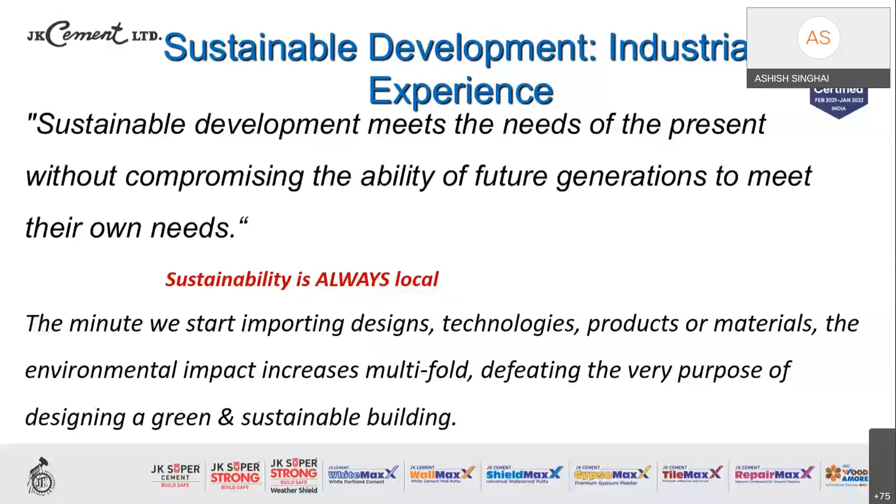The minute we start importing designs, technology, products, or materials, the environmental impact increases manifold. That very well defeats the purpose of designing a green and sustainable building, or for that matter, any built environment. So largely, sustainability is supported on three broad pillars.

First and foremost is environment—resource conservation, environmental protection, biodiversity preservation. Second is society—what is our role towards society? Energy and food security, health services, and all those basic amenities. And obviously, without sustaining the economy, these two cannot work. Economy also plays its very important role—cost efficiency, profitability, and growth valuation of services.

Meaning thereby, if we are constructing a building or any project, if proper design parameters are not put in place, if the materials are brought from far-fetched distances, possibly we may have a wonderful structure, a beautiful architectural structure, but it will defeat the purpose of economy. So environment, society, and economy are the three basic pillars upon which the sustainability model works.

Talking about sustainability and green development, what does it offer to us? Improve the quality of life, protection of the environment. For that, we need to use industrial waste. I will elaborate more in the succeeding slides.

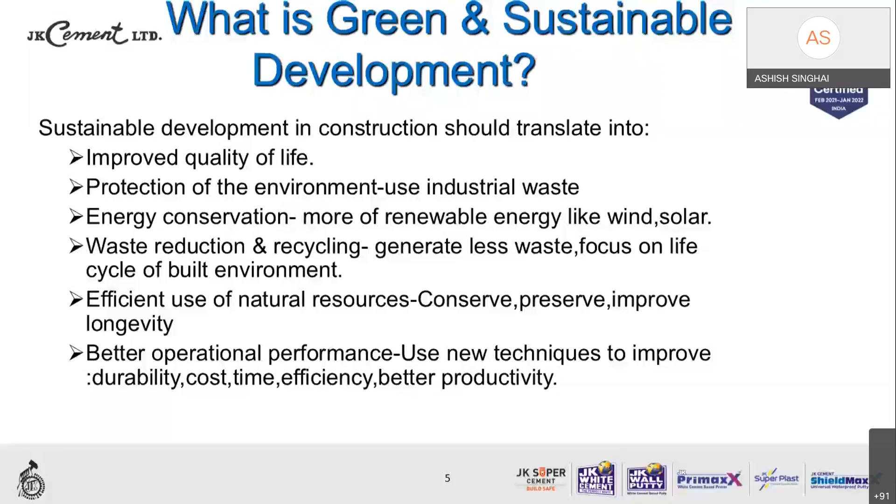Now, talking about sustainability in terms of green buildings, we have to use more green materials in construction. What are the green materials? I will elaborate in the succeeding slides.

Optimizing the demand of electricity. Let us replace most of the electricity by virtue of solar, hydel, and wind power. Generate electricity for the building purpose itself. Cater to all its water demand through sustainable processes such as rainwater harvesting, treating and recycling the wastewater of the site if possible.

So now a green building treats the water which is generated out of its own utilization, and it can be put to use for gardening, car washing, and cleaning of the society areas.

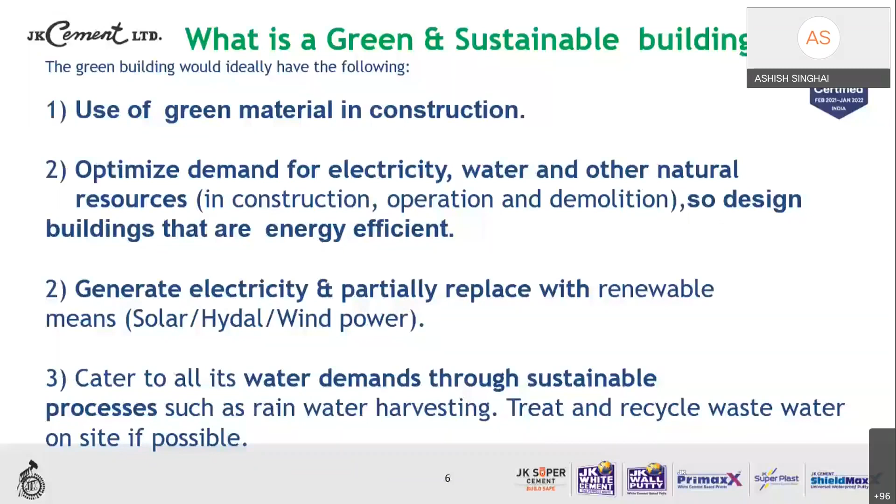Secondly, rainwater harvesting has become almost compulsory in most of the areas, and government is also harping on that. I would like to elaborately mention a very good example of Indore Municipal Corporation, which has mandated that every new construction shall get permission for construction only if they present the provision of a rainwater harvesting system in their house. Such encouraging or binding steps would only encourage rainwater harvesting. As we know, over the years there has been considerable depletion of groundwater tables, and such steps will definitely help conserve our water resources to a larger extent.

Recycling and reusing the waste generated at the site can be put to use in the form of coarse and fine aggregates. Let us generate optimum waste. For that, you need very good planning so that you call only as much material to the site as is required, reducing waste generation significantly.

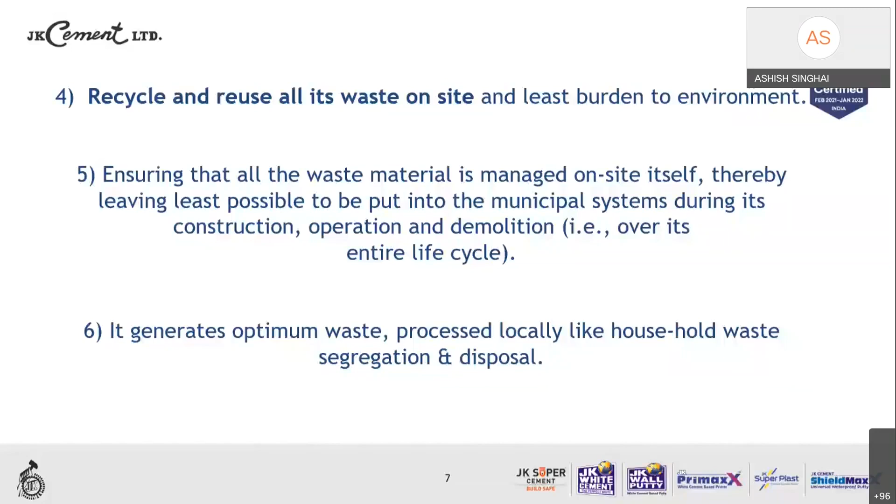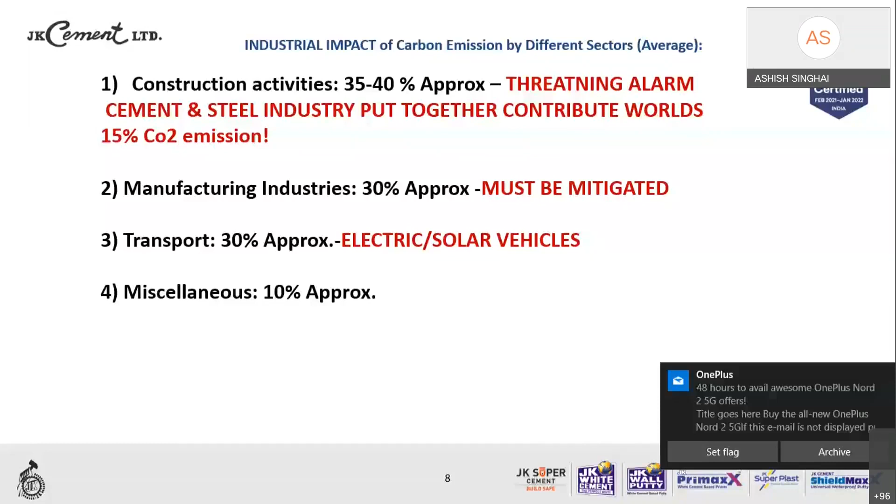Now it's very important to consider the industrial impact of carbon emission by different sectors. We are all concerned about greenhouse gases, about the emission of carbon dioxide and carbon monoxide, which are hazardous, go into the atmosphere, deplete our ozone layer, and thereby increase global warming every passing year. As you must be reading in news articles, every year the globe is getting warmer by maybe 0.5 or 0.7 degrees Celsius. Just imagine the quantum of glaciers that will melt due to this warming, and studies suggest that countries lying along these glaciers or water bodies may not exist a couple of decades down the line as the globe becomes warmer. So all these things have to be anticipated in advance, and for that we need to curtail carbon emission by industries, including the construction industry.

How much carbon emission is done by these different industries? Just a glimpse of that, not elaborating, but a broad picture. Construction activities alone contribute to the extent of 35 to 40%, which is significant. Out of this, you would be surprised to note that cement and steel industries globally put together contribute almost 15% of carbon dioxide emission. That's something huge, humongous.

We need to see how carbon dioxide emission can be minimized or curtailed in these two major industries. Obviously, without cement and steel there cannot be any construction or infrastructure activity, and no growth for the economy. But can we have some technology or system in place to minimize carbon dioxide emission? That is something we all have to look into. Manufacturing industry, apart from cement and steel, contributes almost 30%, so that also has to be looked into.

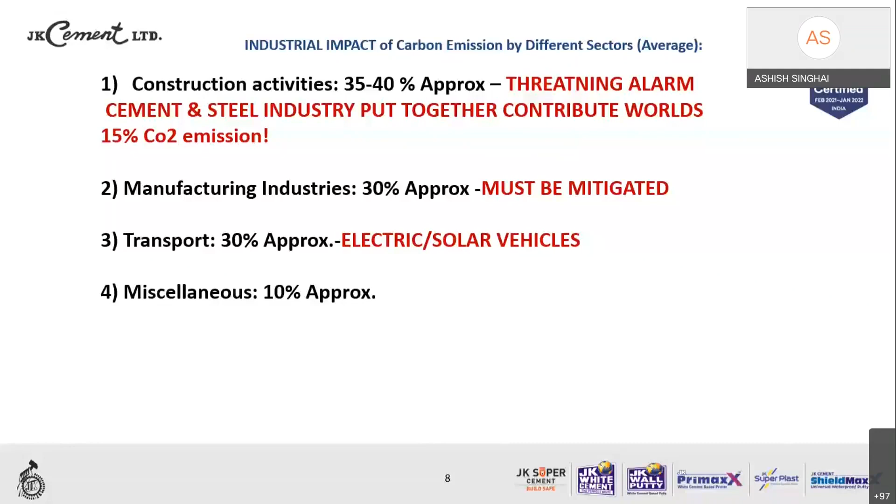Now moving further, I would like to give a brief introduction on embodied energy of building materials, known as EBE. So what is embodied energy? For any material which we see in its proper, finished shape, if we go from the starting point, the product goes from mining or extraction of natural resources to the manufacturing process to transportation to product delivery. All these different channels of product manufacturing have energy contribution. Energy is required from the mining stage to manufacturing to transportation, and finally the product delivers to the end consumer. So all these channels require energy, and this energy inbuilt in that particular product is known as the embodied energy of the building material.

Indian affordable houses do not require much energy in operation, and the maximum energy requirement is during the construction stage. This amply clarifies that we need to focus on the embodied energy of the product not only at the operation stage, but at the same time, at the procurement stage also.

Buildings are largely responsible for 40% of global energy use and contribute towards 30% of total carbon dioxide emissions. So we need to devise technology for minimizing or mitigating energy consumption and carbon dioxide emission.

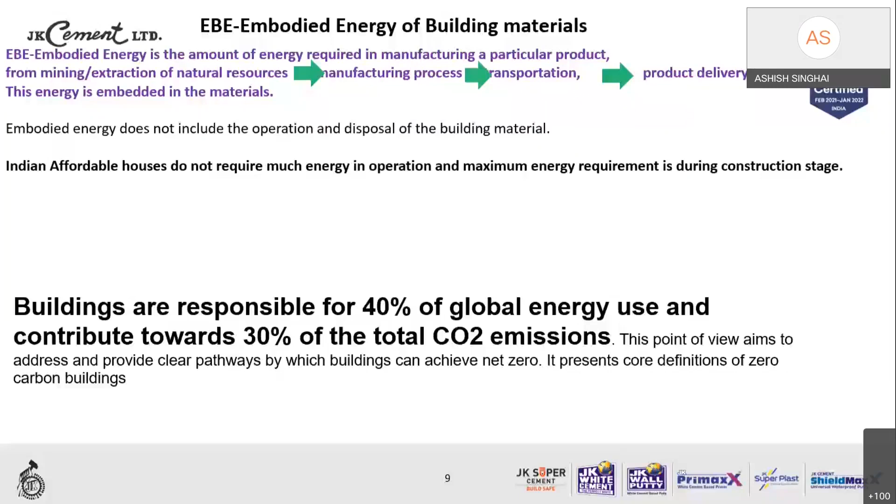What are the sustainable tools for conservation of energy? First is reusing building materials instead of constructing new ones. Renovation and reuse projects typically save about 50 to 75% of the embodied carbon emissions compared to constructing a new building. Instead of going for a new building, can we renovate or make some corrections and make it useful? That will typically save over 50% of the embodied carbon emission.

Second point is specify low carbon concrete mixes. If we make more use of fly ash, slag, and other supplementary cementitious materials while producing a certain grade of concrete, then as the quantum of cement is reduced, the concrete becomes greener, and it can be termed as a low carbon concrete mix. Such designs can be done.

Third is limit carbon intensive materials. What are carbon intensive materials? Materials which require high amounts of carbon dioxide emission during manufacturing, for example steel, cement, aluminum, copper. Such materials which require huge quantum of carbon dioxide emission during manufacturing can be reduced. For products with high carbon footprints like aluminum, plastics, and foam insulation, thoughtful use is essential. We can minimize these elements as far as possible in our construction.

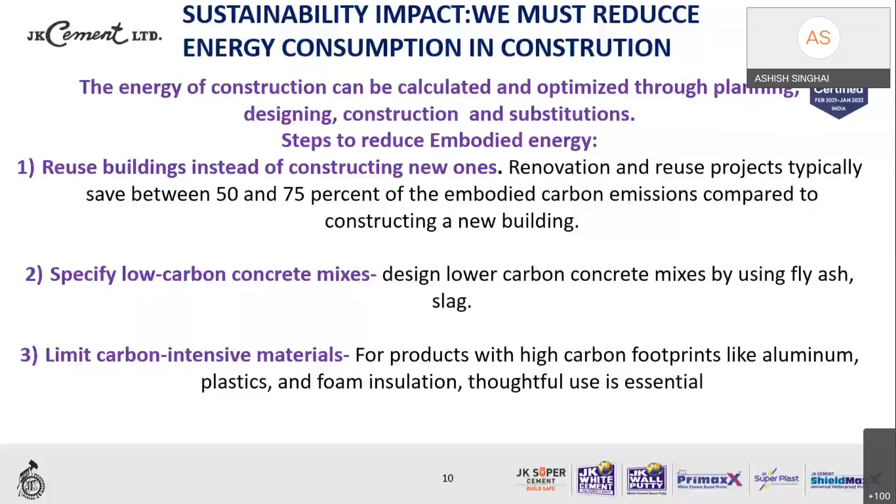Fourth is reuse the materials. Wherever possible, look to salvage materials like brick, metals, broken concrete, or wood. By doing that, we can mitigate CO2 emission.

Next point is to use high recycled material. This is especially important with metals. Virgin steel, for example, can have an embodied carbon footprint that is 5 times greater than high recycled content steel. High recycled content materials have to be a part of your project and your architecture. For example, take the instance of AAC blocks, fly ash bricks, and recycled or reclaimed wood materials that can be put into use in your buildings. By doing that, you can significantly mitigate carbon dioxide emission as far as your project is concerned.

And use fewer finished materials. One way to do this is to use structural materials, good concrete as finish, and minimize waste. Nowadays we have such beautiful quality materials for supportings or scaffolding, like Mivan shuttering material, which gives such a beautiful finish to your structures or concrete members that you need not go for any kind of plastering. The finish itself is so bright, clear and beautiful that plaster can be avoided. We need to design structural members which require less finishing material, and as the finishing material quantity goes down, you've started mitigating the carbon dioxide footprint. We need to design structures wherein waste is minimized to the largest extent.

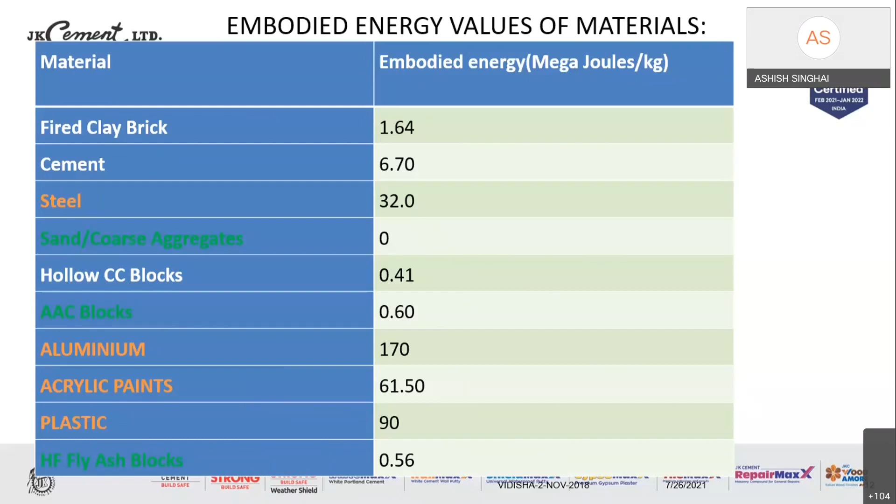This is the embodied energy content of a few prominently used building materials. Just look at steel - it is 32 megajoules per kg, very high. Cement 6.7 megajoules per kg, pretty high as such. Aluminum is almost 170, paints 62, plastic 90. Compare these with natural materials like sand, which requires low energy. Hollow concrete blocks 0.41, AAC blocks 0.6, high fly ash 0.56. Compare these with the materials I already mentioned - there's a huge difference in embodied energy. We need an optimum design wherein more materials with low embodied energy shall be used compared to those with high embodied energy.

Nowadays, a lot of work is being done on net zero, that is decarbonized buildings. This is also part of the climate change resolution passed in Paris. I will read it to you: there is a need to decarbonize, that is to bring net zero carbon dioxide emissions in the world's built environment by 2050, to meet global climate change goals.

CO2 emissions must be mitigated. Climate change and a rapidly warming planet pose a significant threat. According to the Intergovernmental Panel on Climate Change (IPCC), by 2030 we need to reduce carbon emissions to limit the overall temperature increase to below 2 degrees Celsius, in line with the Paris Agreement. So the basic agenda on this international platform is that all-around efforts are needed globally.

To decarbonize, or bring the world to net zero carbon dioxide emissions, is possible only when all economies, developed as well as developing, come together on a common platform. They agree to the resolutions, they agree to all the requirements, they agree to all the initiatives to be taken. Then only can we have sustainability in terms of significantly reducing carbon dioxide emissions.

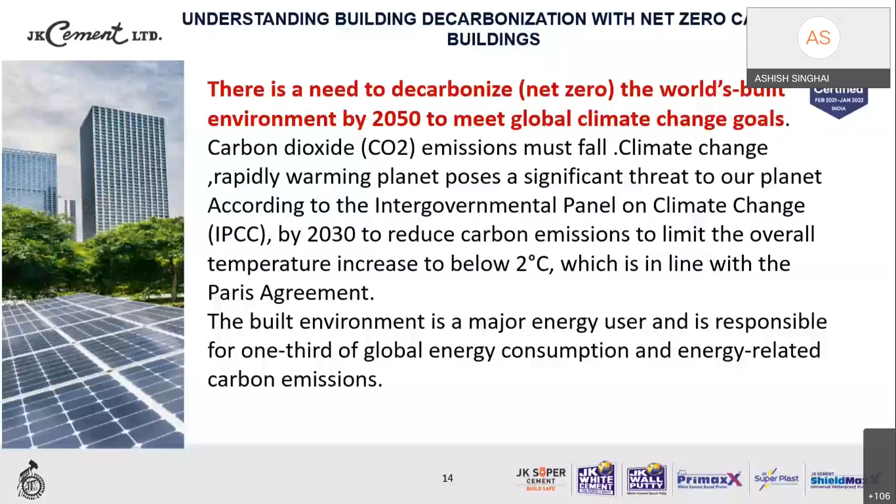Nowadays, different methodologies are being worked out. Talking about civil engineers, green concrete has already been developed. What is green concrete? It is something where we mineralize atmospheric carbon dioxide and inject it into the concrete mix, thereby reducing the amount of cement required in building projects. As we know, cement has a high embodied energy, almost 6.7.

Can we minimize cement content? Then strength and other durability parameters will be affected. So, still keeping durability and strength intact, if we can somehow reduce the cement, green concrete has come up as an option. It is still a very new technology wherein we mineralize atmospheric carbon dioxide and inject it into the concrete mix, allowing us to reduce some quantum of cement for a particular project.

What are the other environmental benefits of green concrete? First, it has very good durability. Energy consumption is significantly reduced, and obviously the basic purpose is significantly reducing carbon dioxide emissions.

What are the advantages? The method of preparation of green concrete is the same as conventional concrete - no rocket science, we can use the same method. It reduces environmental pollution, has very good thermal and acid resistance, reduces overall cement consumption, is economical compared to conventional concrete, and has better workability. So green concrete is going to be the future of concrete.

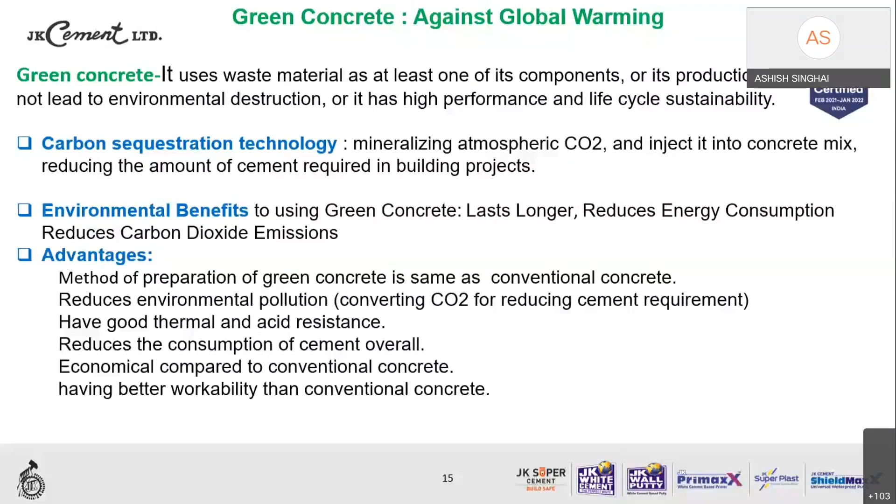What are the other sustainable solutions from the industrial view that will make your structure greener, sustainable, and innovative? I have a number of solutions. I will start with blended cement. Everybody knows blended cement is something where a lot of industrial waste can be put to use, and we can produce greener, sustainable, and economical concrete.

This is done by using fly ash and GGBS. Fly ash is a waste product of thermal power plants, available in abundance - heaps and heaps are available across India, with no proper utilization until a few years back. Now it has picked up good momentum, and a lot of study and research is being done on how to increase and improve the percentage of fly ash in manufacturing cement as well as concrete.

Similar is the case with ground granulated blast furnace slag, known as GGBS, again a waste product from the steel industries. A humongous amount of GGBS is available from these steel plants. Now the government has taken initiatives and incentives to encourage utilization of fly ash and GGBS for manufacturing good quality cement and concrete. BIS already has very good codes in place for both fly ash based and GGBS based cements. I will elaborate a little further in the next slides.

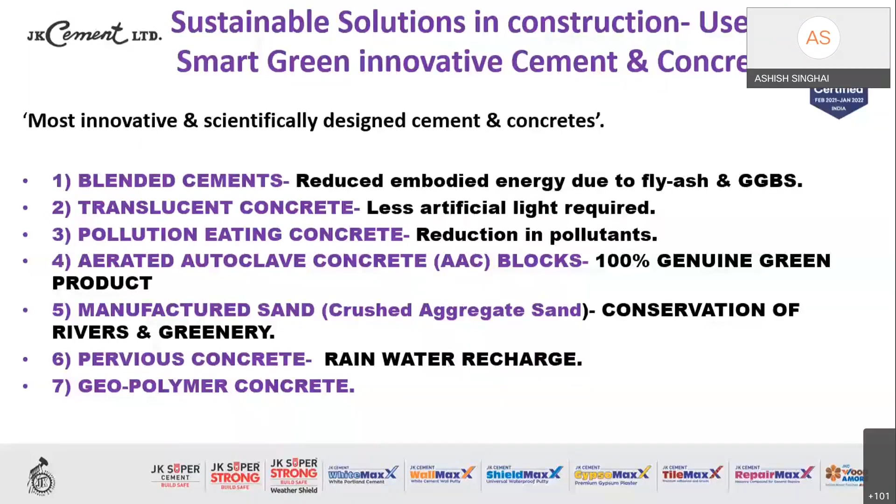So these are all available supplementary cementitious materials for significant reduction of carbon emission: fly ash, slag, silica fume, metakaolin, and rice husk, which is essentially an agriculture waste.

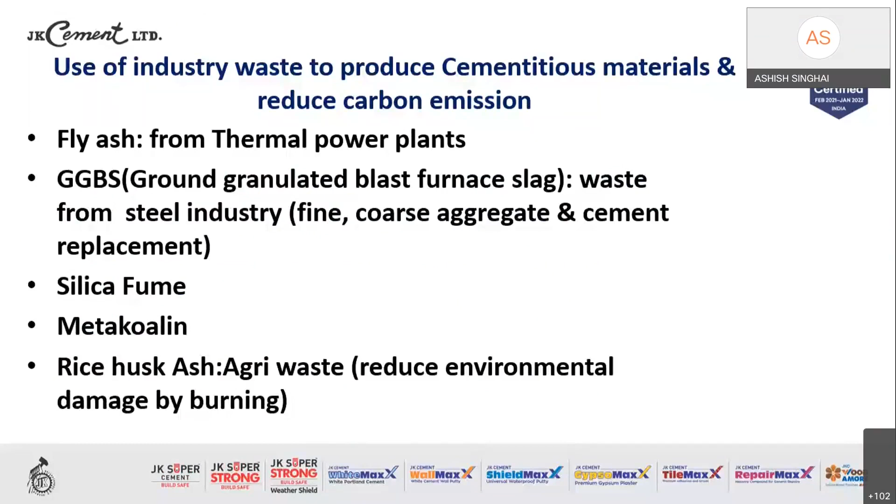But if it can be put in place as far as things are concerned, we can save a significant amount of fossil fuel, that is coal.

What are the environmental issues with OPC production? Every single ton of ordinary Portland cement production releases 0.9 tons of carbon dioxide gas in the environment. That is a very, very strong statement.

As I mentioned, cement and steel industry alone are contributing 15% of carbon dioxide to the global environment. 15%, 1-5, out of which 7% is contributed by the cement industry itself. So we need to ponder on these two statistics very heavily, and design strategies, methodologies, and engineering in such a way that we can have less dependence on all these materials, whereby we can mitigate the carbon dioxide emission. So that will be our support to sustainability.

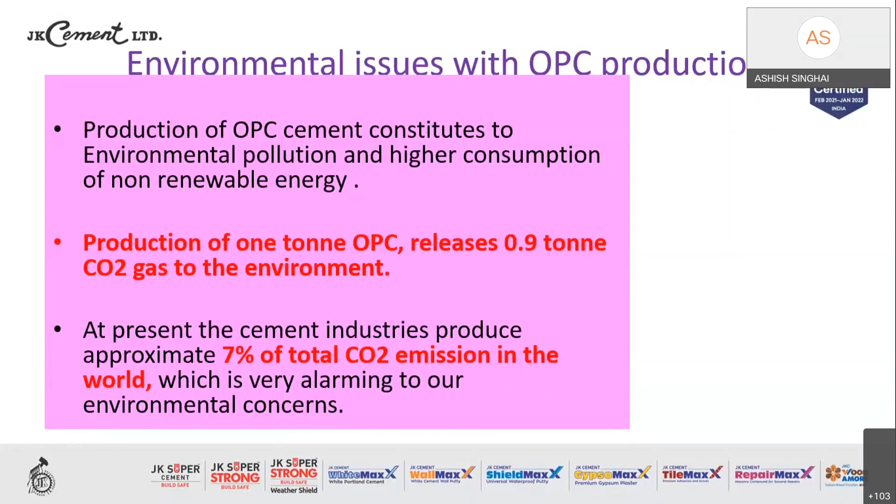As we all know, blended cements are far, far superior, far, far better as compared to ordinary Portland cement. Talking about comparison on strength, it has 15 to 30% better later strength. It has significant reduction of heat of hydration by 35%, so cracks and all such things will not take place.

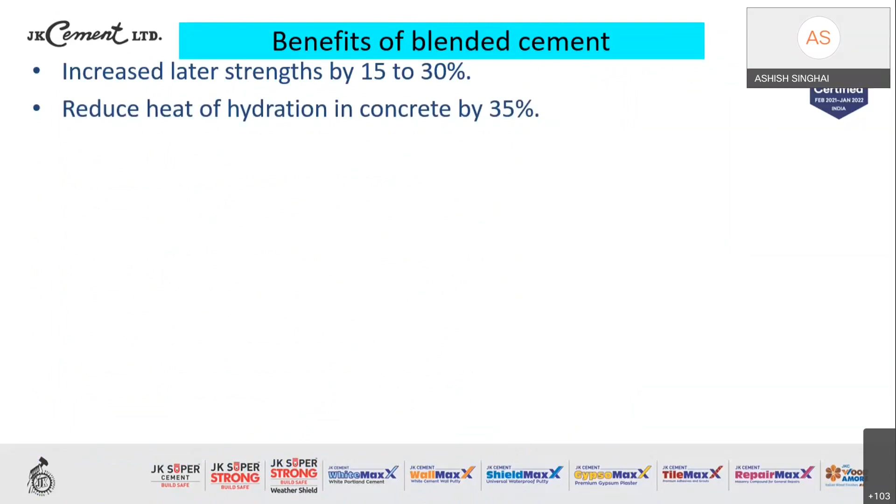It densifies your concrete by 60% more than traditional OPC concrete, so the pore volume gets refined. It increases the water tightness by almost 34%.

It has better resistance to sulfate, chlorides, and alkali aggregate reaction. These are the chemicals which affect and deteriorate your concrete quality in the long run. So if the cement being used for the concrete is blended cement, either PPC or Portland slag cement or sulfate resisting cement, such cements will have better resistance to protect from the attacks of sulfate, chloride, and alkali aggregate.

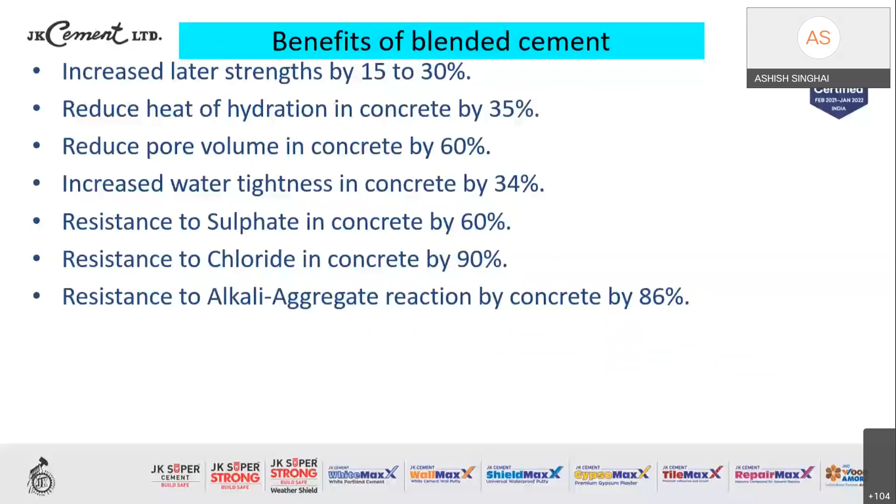So from a sustainability aspect, we can say that the life of limestone increases by 30 to 50%, as across India we have got heaps of fly ash and slag utilized for better quality cement production. So now not only are we getting a better quality, durable, sustainable concrete, at the same time we are reducing the burden on our mother earth by utilizing these waste materials.

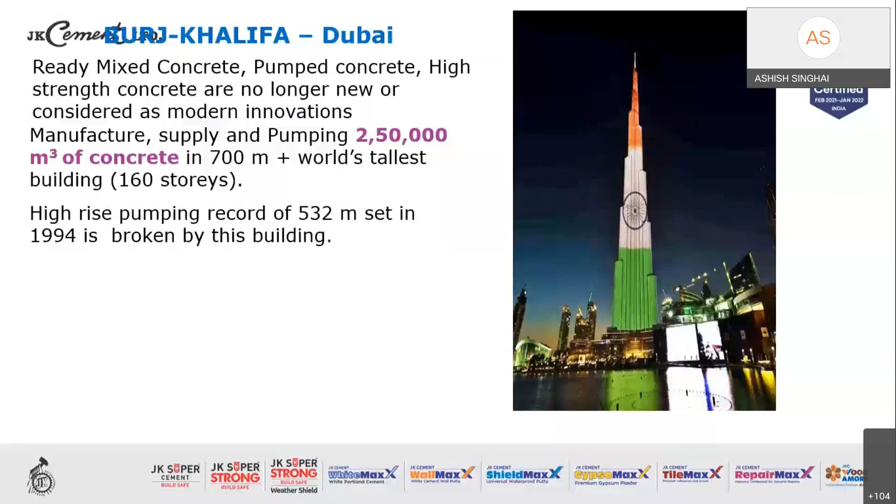Talking about the strength, durability, and overall qualitative parameters of blended cement, I think there cannot be a better example than Burj Khalifa, the world's tallest tower in Dubai, which has utilized more than 250,000 cubic meters of concrete, all prepared with blended cement. The other example is the Twin Towers in Malaysia, where 100% of concrete production was done using blended cements.

So now, what could be the environmental and sustainable impact of all this blended cement? The first thing is that we can reduce 650 million tons per annum of solid waste, that is fly ash, reducing the overall burden of fly ash to the extent of 650 million tons.

800 million tons per annum of carbon dioxide emission can be reduced. This is what we are all talking about. 1,000 metric tons per annum of raw material can be saved in cement production annually, meaning we can have a longer life for our limestone reserves. And apart from that, icing on the cake, we have got higher performance cement and concrete.

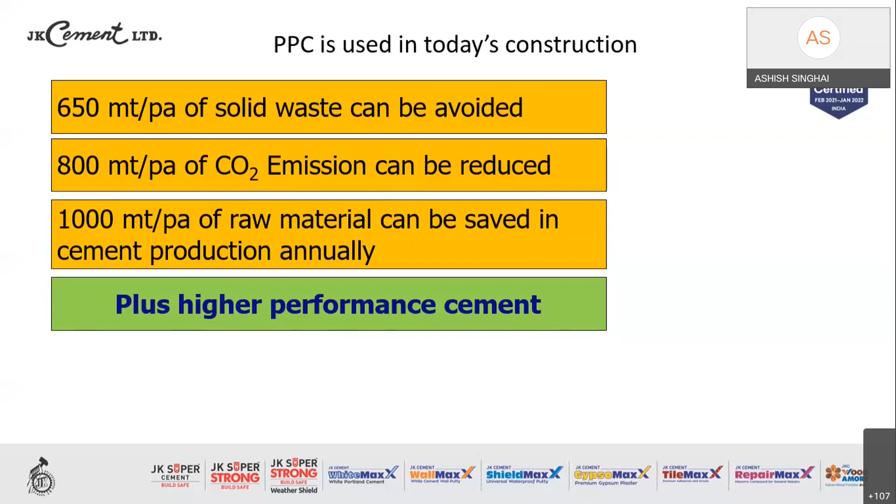So they will essentially harm your embedded steel. We need to go for such type of cements for such type of areas, wherein the impact of chloride attack and sulfate attack, as well as the alkali aggregate reaction, can be minimized to a larger extent. For such type of constructions in these coastal lines, we always recommend going for Portland slag cement or Portland pozzolana cement.

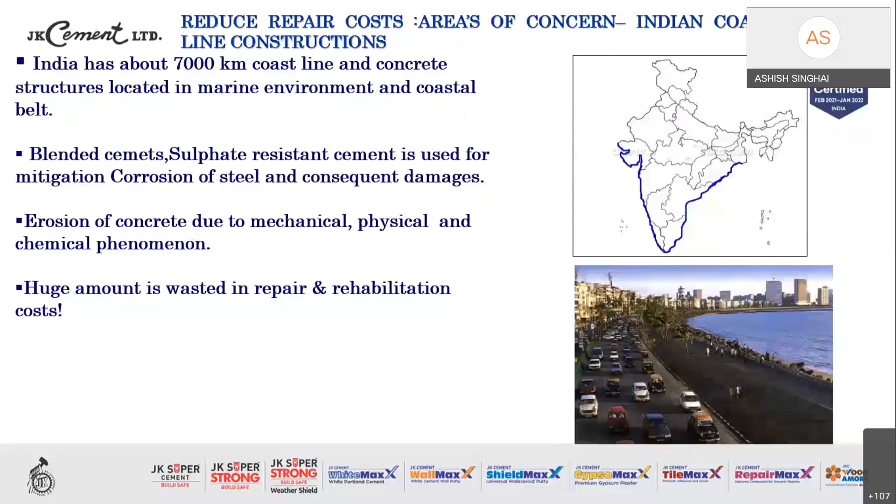That has all come out of our own studies, out of our own understanding, and the kind of years that we have witnessed the quality of such structures which were constructed using all these materials. If ordinary Portland cement is being used in the concrete for such type of coastal area construction, whether it is a pier or any kind of structure situated along the lines of these marine areas, you will see what kind of deterioration it can lead to.

Now, how to minimize dependence on artificial lighting?

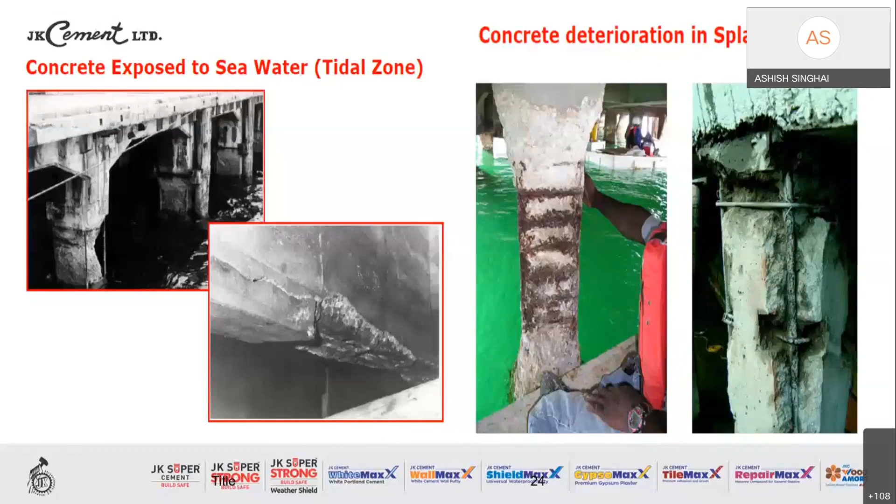One architect from Hungary, Mr. Áron Losonczi, has developed a wonderful material by the name of translucent concrete, or in simple language, light transmitting concrete.

How does it take place? He used 96% fine aggregate and inserted optical fibers to the extent of 4%, plus some good quality additives, fillers, and polymers. By combining these, he prepared a concrete where deliberately no coarse aggregate was used.

Using that, the density achieved was about 2,100 to 2,400 kg per cubic meter. It was light in weight, but the optical fibers inserted within that concrete matrix meant that when light was emitted from one side, it got transferred to the other side.

40% of visibility was there within that concrete element. This was a very novel and unique design by Mr. Áron Losonczi. The only limitation is that it is not a structural member. It can be used as a facade or as a building block for buildings, especially for green buildings - quite ideal and very aesthetic to look at.

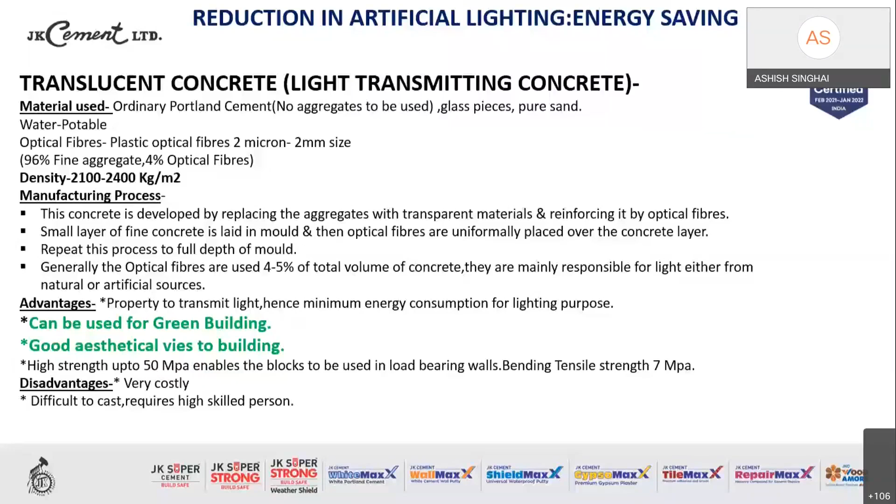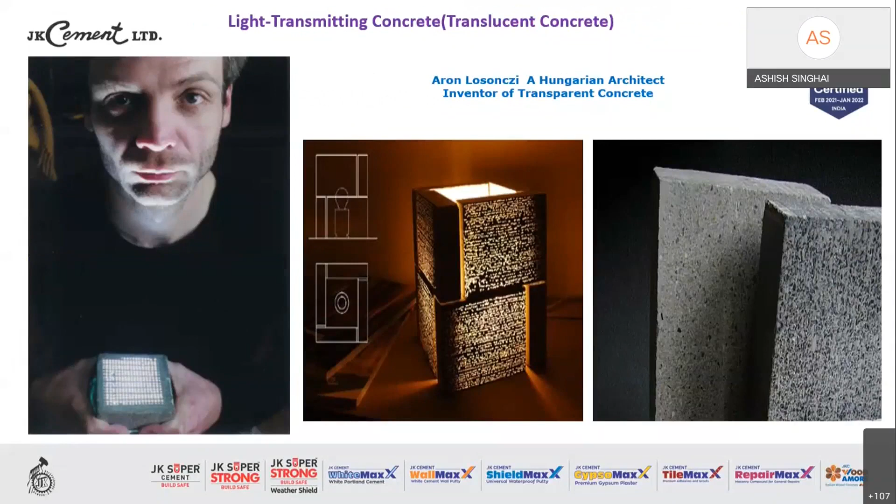A few more pictures of that. If we can use this kind of block in our buildings, especially sun-facing buildings, or where the facade can be of larger size, we can ensure that dependence on natural light increases and artificial lighting can be significantly reduced, thereby reducing overall electricity consumption bills.

Now, talking about pollution eating cement, a very noble and innovative kind of cement being developed by the Italian firm known as Italcementi. Coincidentally, I was working with this organization a couple of years back. Italcementi is the world's third largest cement and building material manufacturer.

What did they do? They mixed titanium oxide with normal cement plus a few polymers and prepared a cement which has a wonderful quality of converting the polluting oxides into oxygen plus nitrogen, which can be easily washed off. Now, when can it be used? In structures which have hazardous chemicals in the form of nitrogen oxides and volatile organic compounds.

These pollutants have a tendency to settle on the top surfaces of buildings, and they remain there for years together. They do not break down, and cannot be wiped off easily. Now, if we just apply a coat on the top surface of the building with this particular cement...

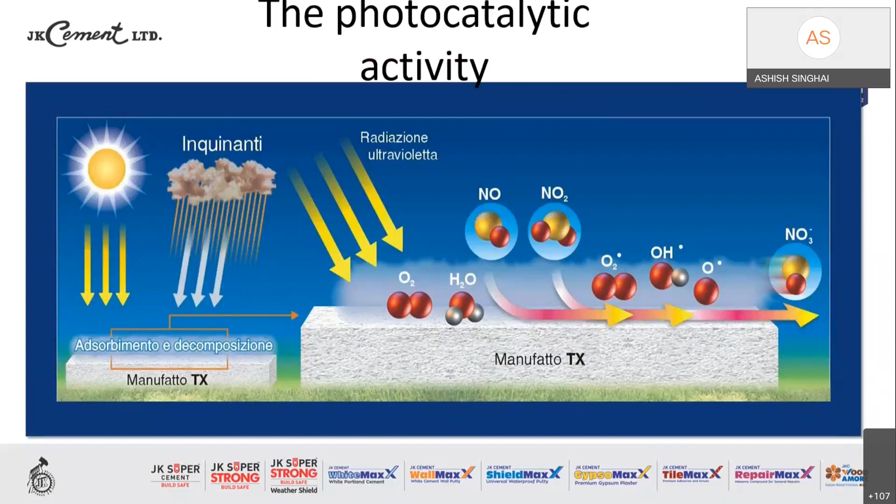The only thing is that it's a very costly material, not available in India, but across developing countries, or maybe developed countries like France, Germany, Japan, and some parts of the United States of America. This particular product is used extensively for external facade pasting.

A very sustainable concrete, pervious concrete, is nothing new. Most attendees might be aware of it, but it has become the need of the hour in the context of continuous depletion of our groundwater tables in many states of India. Pervious concrete is not rocket science any longer. It can very well be used and manufactured with simple methods. Most ready-mix concrete manufacturers already have this technology with them.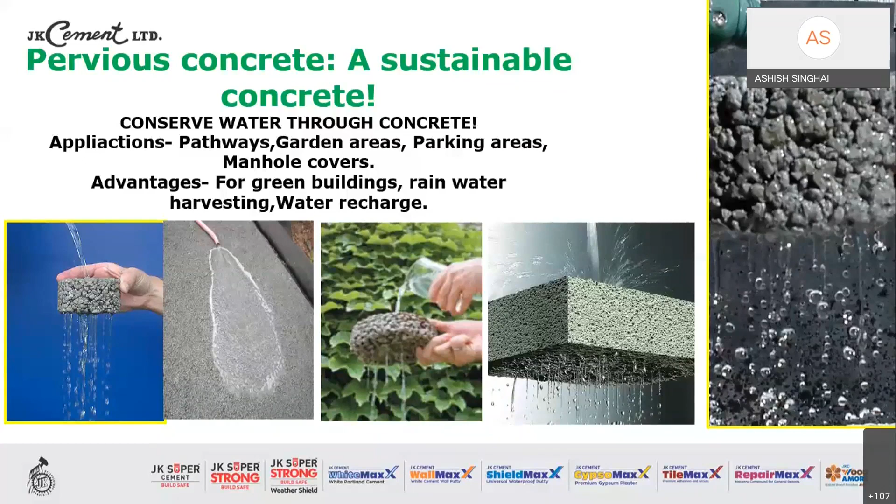Pervious concrete has large volumes of interconnected voids, almost 15 to 35%. In typical concrete, BIS permits up to 1% of voids, but in pervious concrete we have a very high percentage of almost 15 to 35% of voids, which are interconnected. It is made from cement, coarse aggregate, and water. Cement and coarse aggregate put together make about 95%, and then we have some fillers, fine sand, as well as some polymers, and obviously water.

It contains little or no sand, which results in a porous structure so that water passes easily. When used for paving, it can take in storm water at a rapid rate of 3 to 5 gallons per minute per square foot of surface area, which exceeds the flow rate needed to prevent runoff in most rain events.

During the rains, as we are already in the rainy season, unfortunately in Indore city, most roads, areas, and even gardens have been completely concretized. Wherever we glance, we do not see green pockets, soft soil, or black soil around. Whether within the colony or along the roads, you will find paver blocks have been laid. A lot of concrete roads have been built, even in smaller colonies, concrete roads or tar roads are being built.

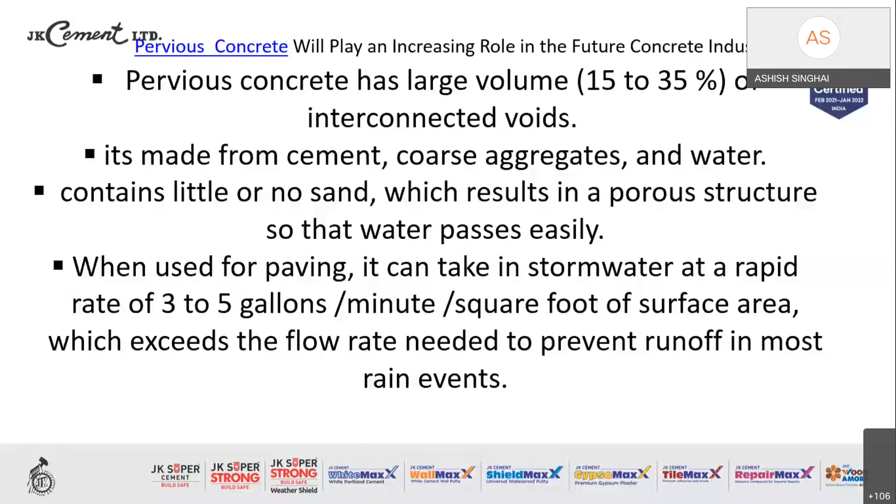Now, a very big subject in the context of industrialization, urbanization, and river management. When I talk about river management, we see that most rivers are getting depleted, and a few have become completely extinct. Now they are only confined to the books. We do not even have a glance of them, we do not even know whether that particular river existed some years back. Why has it happened? It has happened because of enormous depletion, or I would say brutal mining of river sand for many years, for many decades, and we have completely murdered these rivers.

And unfortunately, it is still being done. It has also become a matter of dispute between the sand mafia and the government agencies. And we have been witnessing all such news time and again through our television or newspapers.

So it is a big concern for the government as on date. Why are the rivers dying? Simply because sand is continuously brutally explored, mined from these rivers, and there's no option to that.

But nowadays, the construction industry has come up with a lot of options. The civil engineers have given a lot of solutions to the construction fraternity, that instead of exploring river sand, we can very well use these options to replace it, which not only conserves river sand, but at the same time has better technical qualitative features overall as compared to river sand.

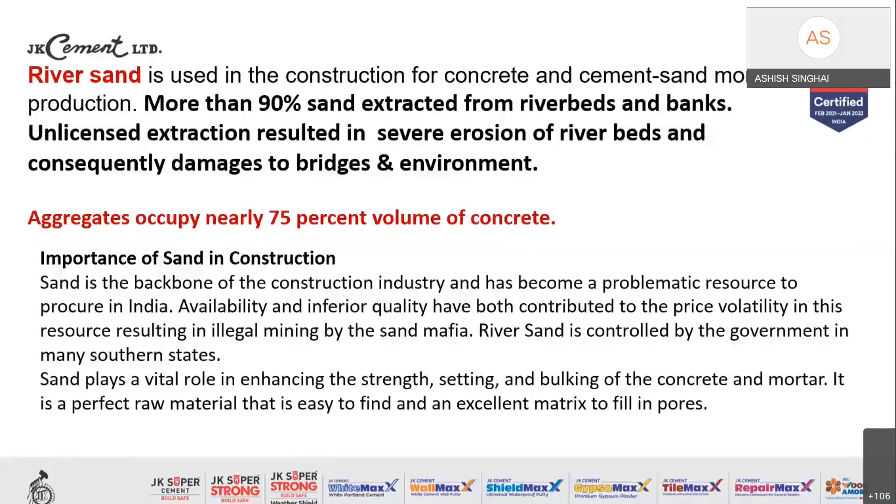Crushed stone aggregate, also known as M sand. We have got slag sand now being used, I will give a few slides on that. Aggregates from demolition waste and recycled concrete aggregates - that is a very good topic to discuss upon.

Industrial waste, especially pond ash, are a viable alternative. As we discussed in the previous slide, fly ash can be used for better quality cement and better quality concrete. But apart from that, pond ash can be used as a replacement of sand or the aggregate.

Foundry waste, copper slag, ceramic waste, etc., or even to some extent in some countries like Hong Kong, they have experimented with glass waste also. Glass was reduced to 4.75 millimeter down sizes, whereby they can use it as a fine aggregate also for limited type of applications.

So all waste material, by virtue of these industrial outputs, can be put into use as either sand or coarse aggregate, and thereby we can reduce the burden on our Mother Earth.

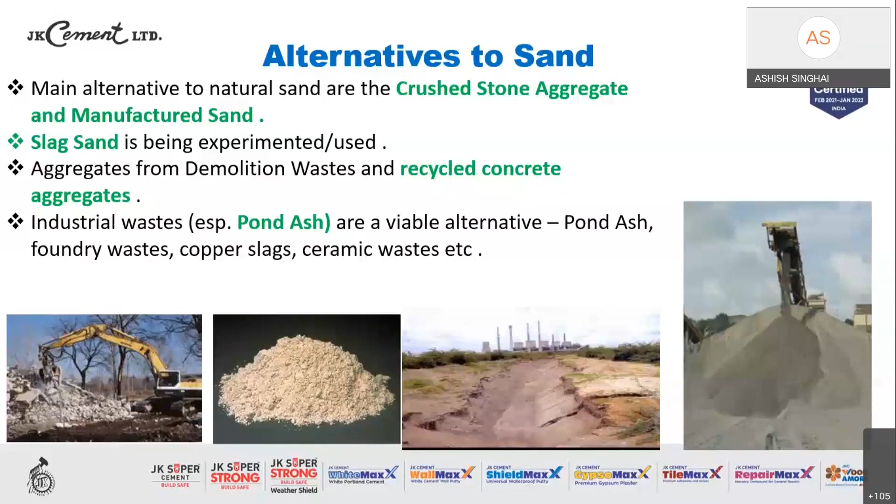So moving on, talking about fly ash utilization in India. This slide at the bottom shows a good scenario that every passing year the percentage utilization of fly ash is increasing. From 13-14 it was 57%, it has grown up to 69% up till 2018-19. My data is up to this year only. So this is a good scenario actually, but we need to even increase the percentage even more.

For that, the government's incentives and the industries, especially the cement industry and block manufacturers, need to come forward, and government has to make certain amendments whereby the fly ash percentage can be increased in cement as well as in concrete. Nowadays we are talking about high volume fly ash concrete, wherein the fly ash percentage can be up to 50% also, subject to certain grades and using some good quality plasticizers and polymers.

So all these studies are going on. People have become conscious, and fly ash, which a couple of decades back used to be a burden on the earth, has now found its utilization and is being sold. It has become a commodity - people have started branding it also, which is a very good, welcome scenario for our industry. So as the percentage of fly ash increases, we definitely have a very good chance of ensuring sustainability.

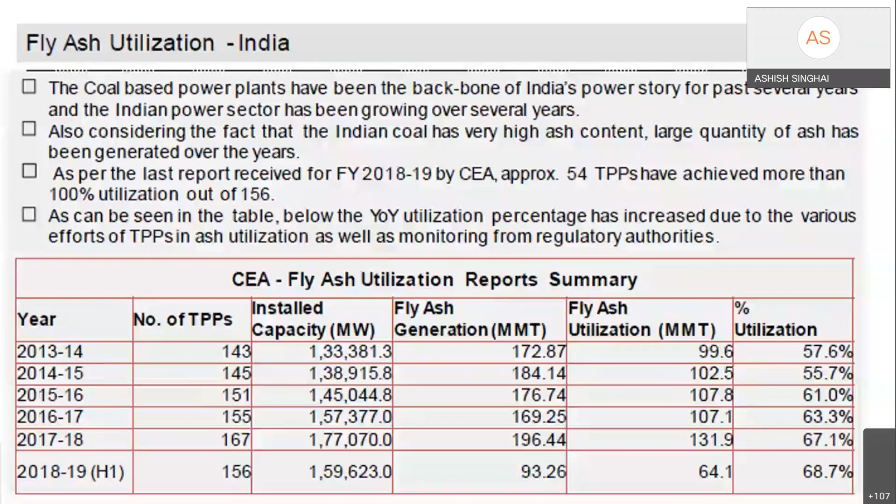Cement industry is going to be the largest industry for effecting this fly ash utilization. The industry is already hell-bent on it. Currently it is 35% as per the Bureau of Indian Standards. If the percentage is allowed to be increased more, cement industry will take up this assignment, with their own research and development, and possibly going forward we can see high fly ash cement also.

It could be used for plastering or masonry work, not necessarily for structural work. But as far as the stipulation up to 35% is concerned, fly ash addition can be used for any kind of concrete structure of any grade.

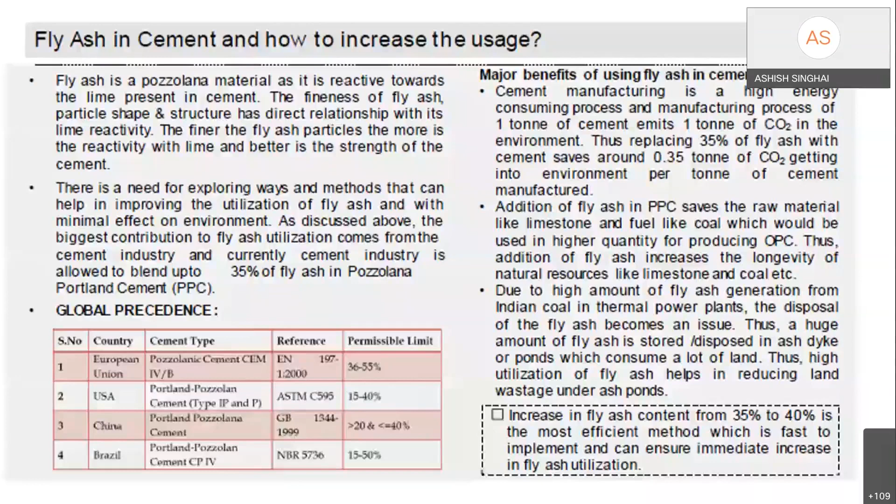This is a map that very clearly gives you a picture. The blue dotted blocks are the cement manufacturing clusters like Satna in Madhya Pradesh, Bilaspur in Chhattisgarh, Nalagonda in Andhra Pradesh, Yerraguntla in Andhra Pradesh, Gulbarga in Karnataka, Chandrapur in Maharashtra, and Chanderia in Rajasthan. These are all 7 big clusters known in India, where almost 70 to 80% of the cement is being manufactured.

Now we need to focus on all this cement industry itself, and the connecting thermal power plants can have a good accessibility and connectivity with all these cement clusters. If the cement industry itself takes up the assignment of utilization of fly ash in a larger way, possibly we can meet our targets earlier than expected. Likewise other industries like block manufacturers, or for that matter even geopolymer, is also one industry where fly ash can be utilized.

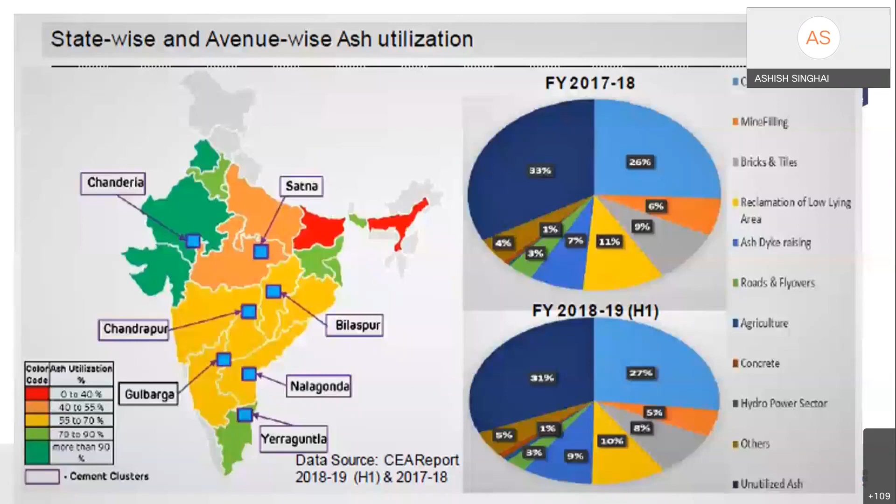M sand is obviously another option, we all are aware of that. Coarse aggregates are further crushed and brought within 4.75 millimeter sieve sizes, and thereby it becomes useful to be used as a coarse fine aggregate.

Now, as I said, government authorities have started advocating, specifying, and promoting these alternate sources of sand.

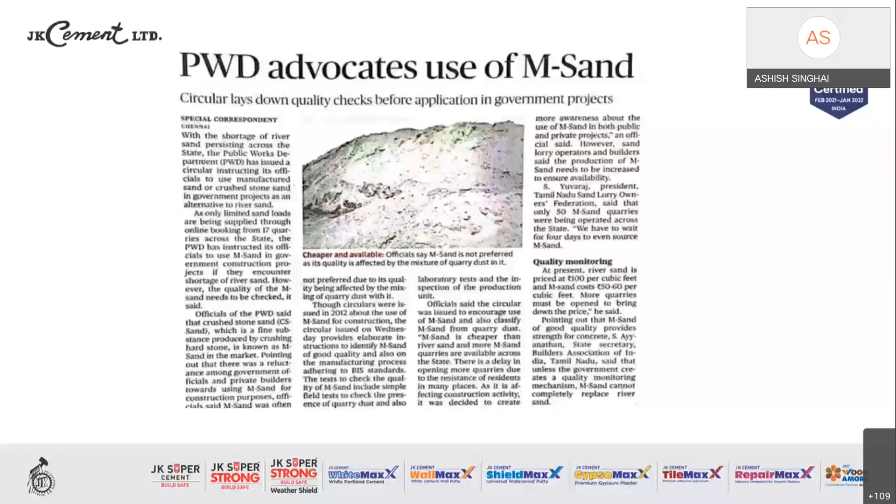One case study from Hong Kong, not very much in India, but Hong Kong has taken up this study and they have used crushed waste glass to be used as fine aggregate. But the only thing is the high collection and transportation cost - the cost of producing crushed waste glass is about $1,000 per ton - is a concern. So more study and modification needs to be done. Then only this crushed waste glass would be a viable option, but it is confined to Hong Kong only as of now.

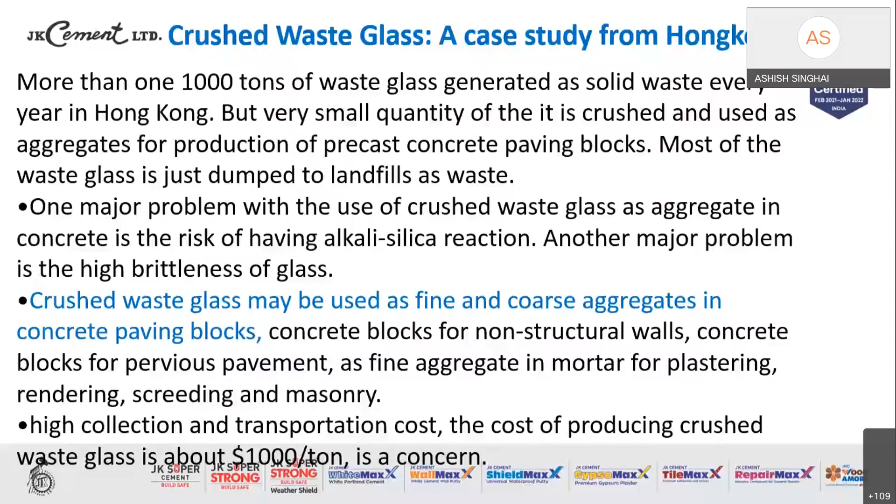Slag sand, as I mentioned, is going to change the scenario. In down south, a couple of manufacturers have already started manufacturing slag sand. Obviously, it is derived from the same ground granulated blast furnace slag. If it is powdered to fine levels, it can be used as a replacement of cement. If it is kept slightly coarser, up to 4.75 millimeter, it can be used as slag sand. And if it is kept a little more granular in size, above 4.75 millimeter, it can be used as a coarser aggregate or maybe partial replacement to the coarser aggregate.

So slag sand is going to become a big game changer, specifically for those areas where steel plants are situated nearby, so that particular slag can be crushed to 4.75 millimeter down sizes, and it can be used as sand.

Now, the very positive thing is that it can be used 100% individually, or in combination with river sand, or in combination with crusher dust or M sand. So this combination can be utilized, but with a very basic intention to minimize river sand utilization.

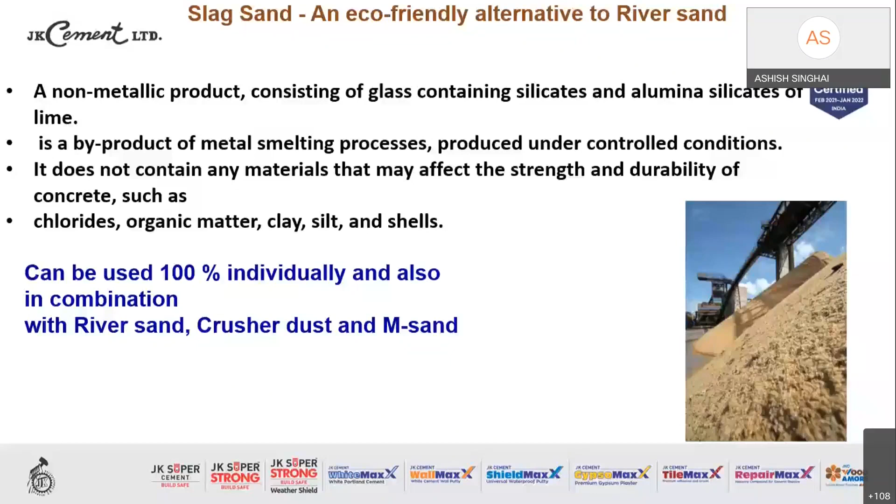A lot of studies have already been carried out, and NCCBM has mandated its use. As you can see, different percentage levels of natural sand, M sand, GBS blast furnace slag, and combinations of this particular GBS blast furnace slag with natural sand, M sand and crusher dust are shown. You find that the 7-day and 28-day strengths are found to be better when this particular slag sand had 50% replacement. So that gives a very good idea, and we have got figures in place to go ahead with.

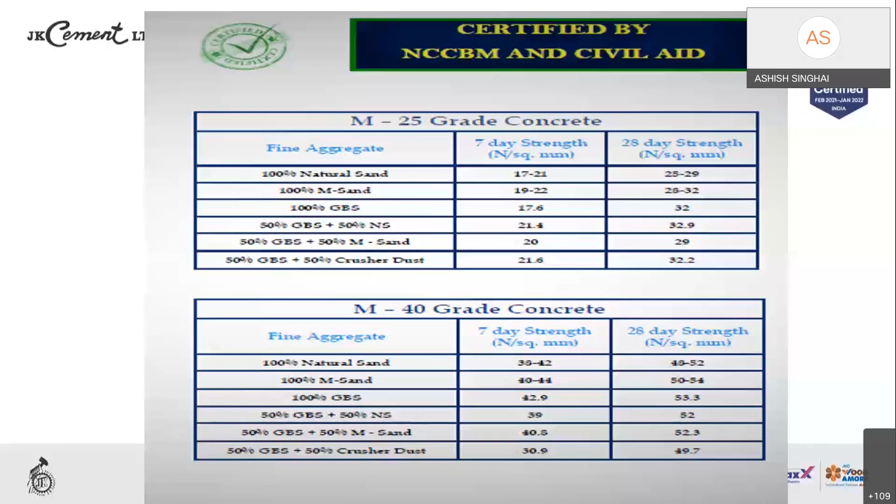NHAI, Delhi Metro Rail Corporation - they have all done their own studies and given certificates that it can very well be used as a replacement, or as a partial replacement, to river sand.

Now talking about further industrial application on sustainability, one very vivid example I can quote, and I always quote, is aerated autoclave concrete blocks. It has changed the perspective of blocks or bricks in the last 5-7 years in India specifically. Now, AAC block is something which has only 20% cement and 80% recycled raw material - that is fly ash, gypsum, lime, alumina, and water. Only 20% is cement.

So that makes an ideal green building material. Not only is it light in weight, but it is eco-friendly. By using such type of block, you get green building credit points, you're contributing towards reduction in carbon dioxide emission. In all, you are supporting the sustainability objective. So AAC block is going to be the key building material that will support our sustainability objective.

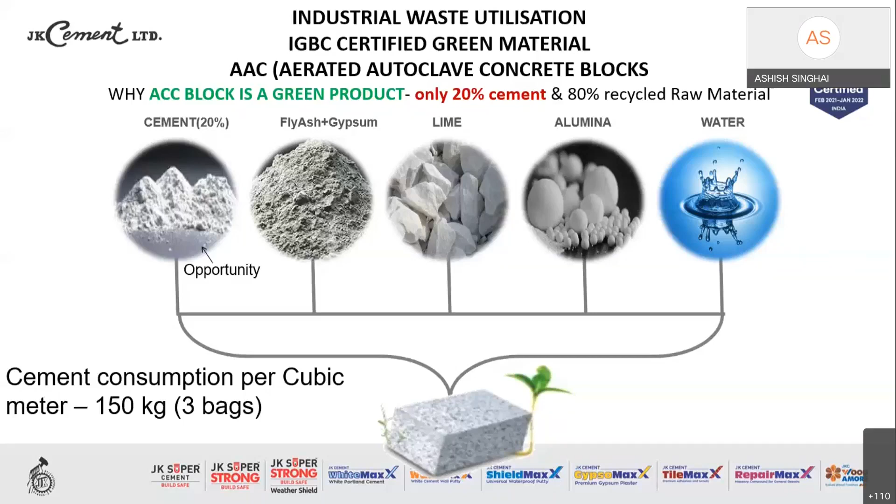Its use is light in weight, eco-friendly, fire resistant, with very good thermal and sound insulation. Fewer number of joints because it is quite large in volume. Dimensional accuracy because it is manufactured in plants. It is available in different sizes, enabling builders to experiment with sizes. It can be used for all kinds of internal and external walls. Good for air conditioned buildings and fire rated insulation buildings also. So these are the different elements and application areas.

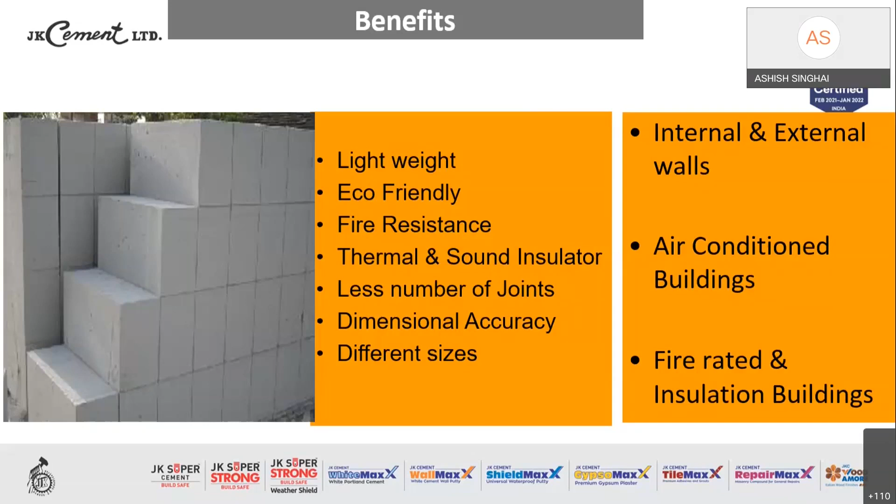Construction and demolition waste has become a drive of the nation. Not only the central government, but state governments, and under the state government, municipal corporations have become alert. All the engineering departments of the state have become alert, and the focus is now on first and foremost minimizing the C&D waste, and even if the C&D waste is generated, how to make it useful, how to convert it for useful applications in terms of fine aggregate, coarse aggregate, etc. So a lot of efforts are being done.

What are the different types of C&D waste? Apart from concrete, we have excavated material like soil, tiles, ceramic, bricks, asphalt, concrete, plaster, POP, glass, plastic, which comes because of pipes and conduits, etc. Then we've got metals like aluminum, steel, wood, etc. So these are the different materials that we get in the form of C&D waste.

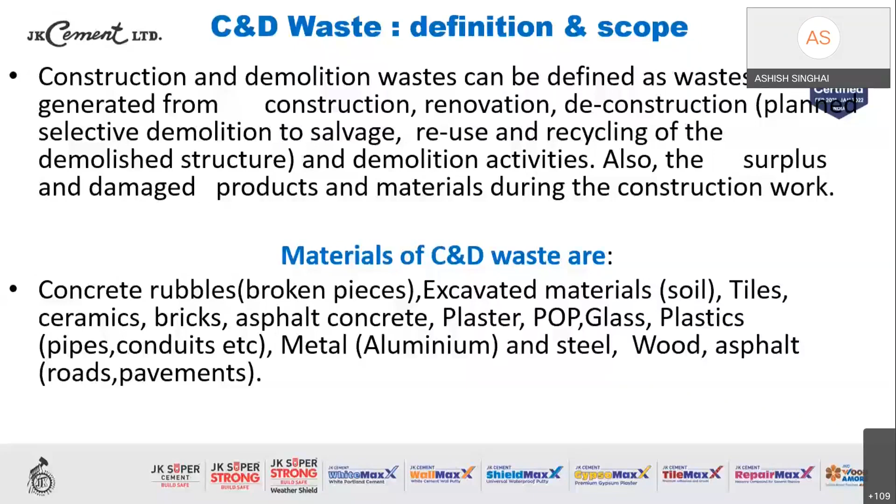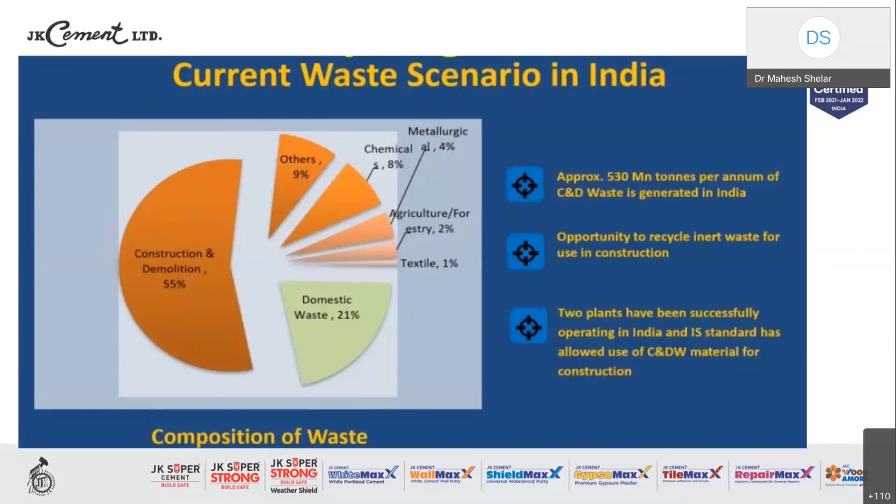This is a very common scenario that we quite often see all across whenever we go on roads. This is how our demolition waste is thrown just like that.

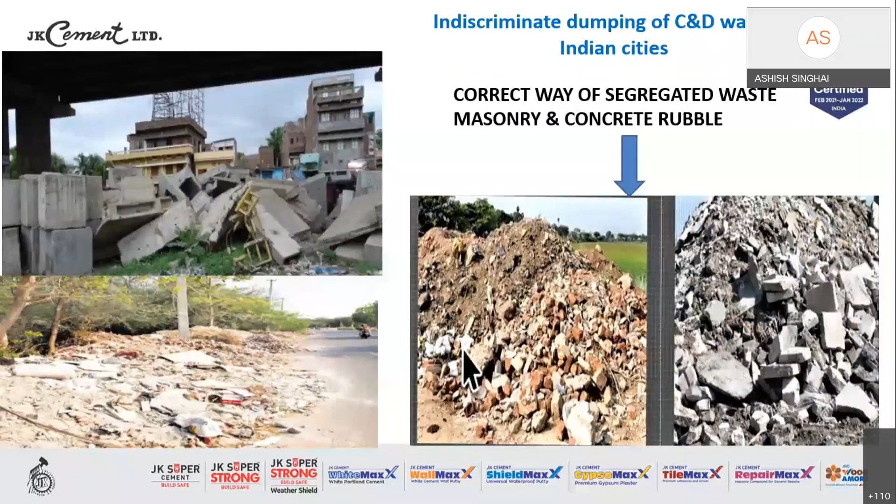Now, typical composition of C&D waste, if we drill down to the percentage terms in material. Soil, sand, and gravel has a composition of 36%. Brick and masonry has almost 31% out of the total C&D waste. But our interest is concrete at 23%, and brick and masonry at 31%. So these are the two broad parameters where we focus, and we try to recycle this quantity into useful products like coarse and fine aggregate.

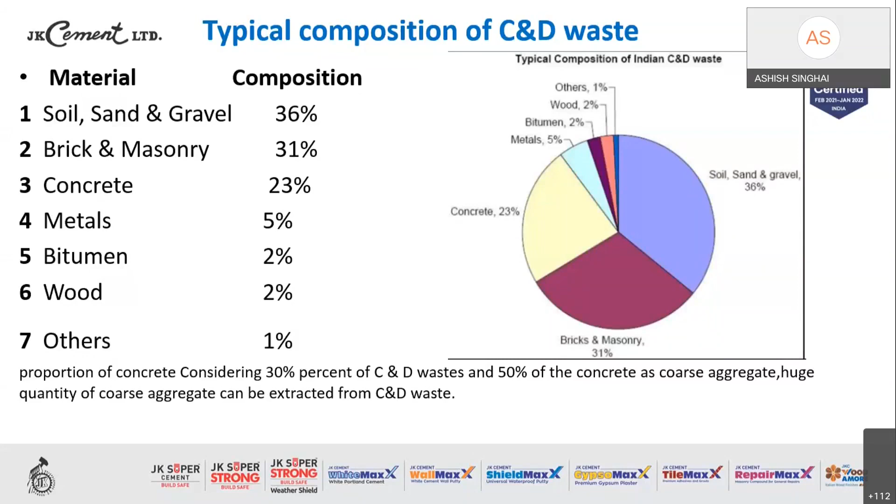So what are the initiatives taken by the Government of India or the BIS? BIS IS 383 is the main standard for coarse and fine aggregate for use in concrete, revised in January 2016. It permits use of recycled aggregate up to 25% in plain concrete and 20% in reinforced concrete of M25 or lower grade, and up to 100% in lean concrete of grade less than M15.

So it sums up everything. As far as plain concrete is concerned, 25% can be replaced with recycled concrete. In case of RCC, up to M25, 20% replacement, and if it is lean concrete, it can be up to 100% replacement.

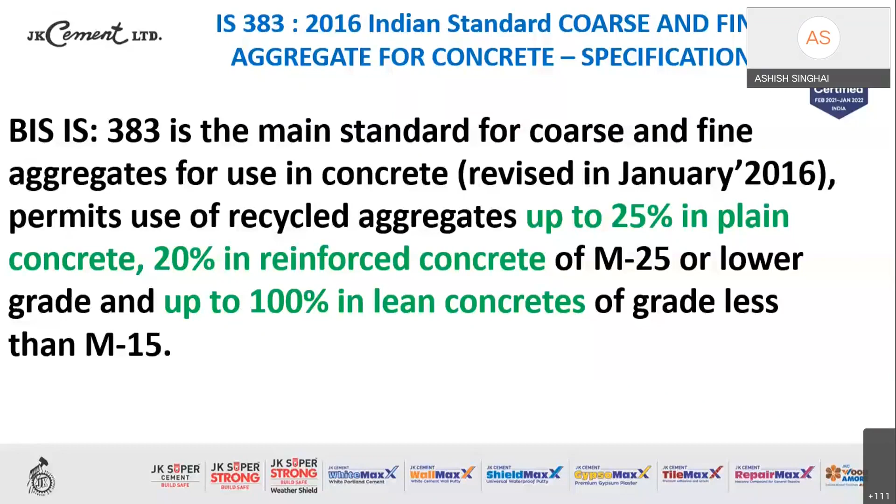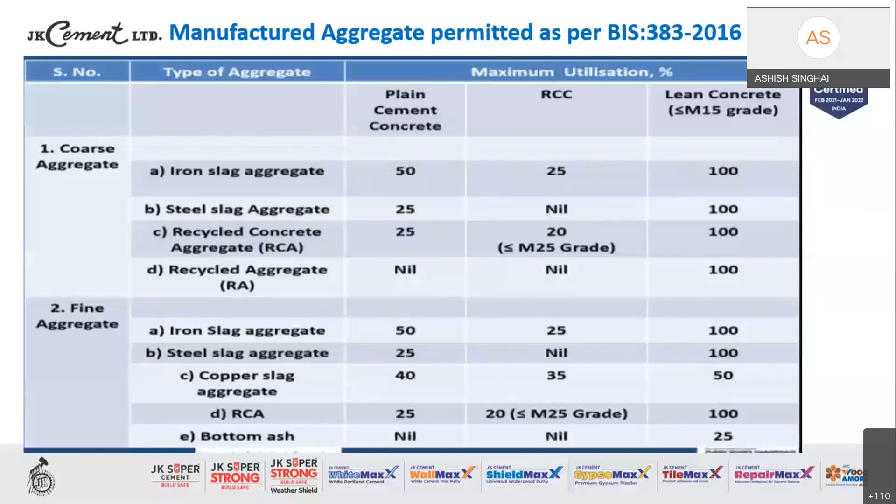So C&D waste management and recycling is quite familiar nowadays. First is recycling of concrete and other CND waste. Then we have to look into the quality of concrete also. Reinforcement steel can also be extracted from the embedded items, and it can also be recycled and sent to recycle steel plants. Recycling of CND waste takes place either at the site or it can be sent to a plant.

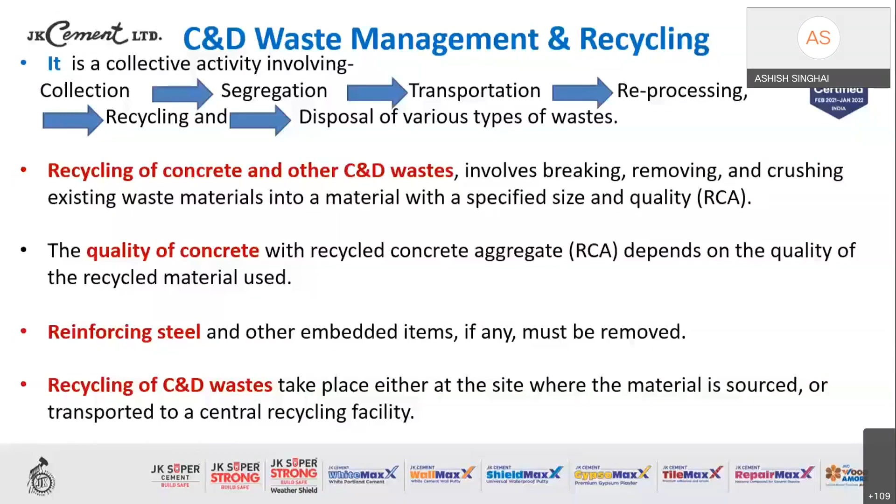Now, what are the guidelines on C&D waste? First and foremost, ban on landfilling. Up till now, people used to think and act, just fill the land wherever you find the space. So the first thing is that now it has been banned. Second point is segregate C&D waste at the source itself. Third point is recycling the C&D waste. Fourth point is develop the market for recycled products. Even if you have recycled the material, are there any takers?

So government needs to incentivize and promote R&D about C&D waste. Then we have to promote deconstruction instead of just demolition. What is deconstruction? That is scientific and methodical demolition. One option is to just blow it up, so everything gets messed up at the demolition site. The second option could be deconstruction - that means planning the demolition in such a way that it is methodical, step by step, extracting the maximum usable items out of the construction or demolition activity.

Using materials which have longer life, the wastage can be minimized.

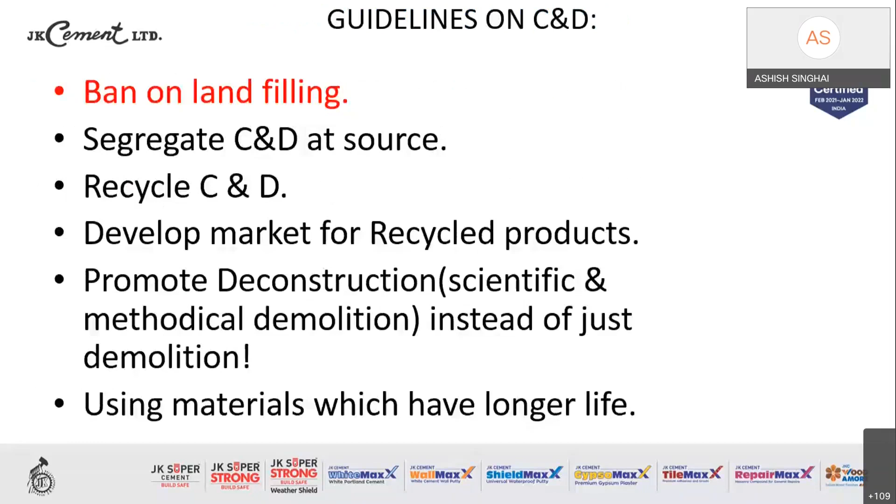What are the different government agencies involved? There is BIS already in place, the C&D Waste Management Rule 2016, and the National Building Code also has specified guidelines. Ministry of Urban Development, Government of India 2012 has given very clear guidelines on this, along with BIS 2016, Indian Roads Congress 2016, CPWD, and NBCC. All these central government agencies have given a clear mandate with specific guidelines for utilization, promotion, and incentivization of C&D waste management.

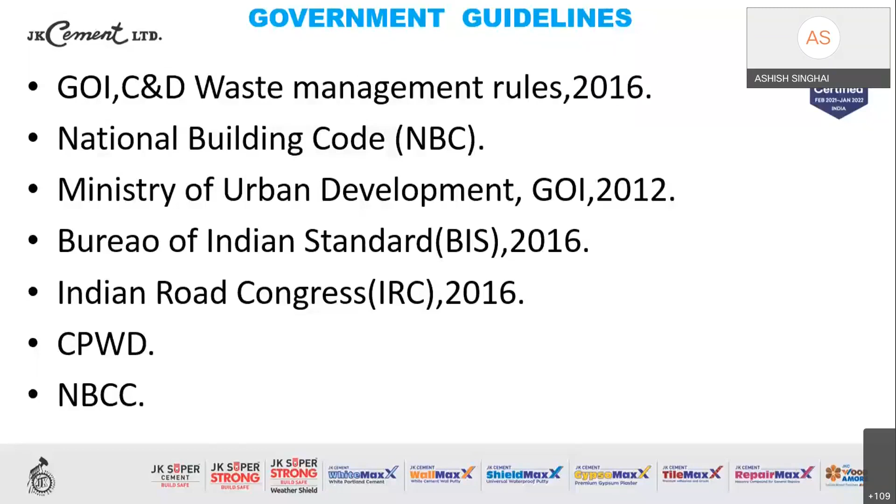I will not ponder much on these slides, just a quick look at CPWD and NBCC guidelines. CPWD and NBCC have recommended use of recycled portions of C&D waste in their construction activities, if the same is available within a 100 kilometer periphery from the construction site.

It's a kind of encouragement. Looking at the Ministry of Urban Development, they have given a very clear guideline that every city with a population over 10 lakhs must have a facility in place to process and convert C&D waste into meaningful items of coarse and fine aggregate.

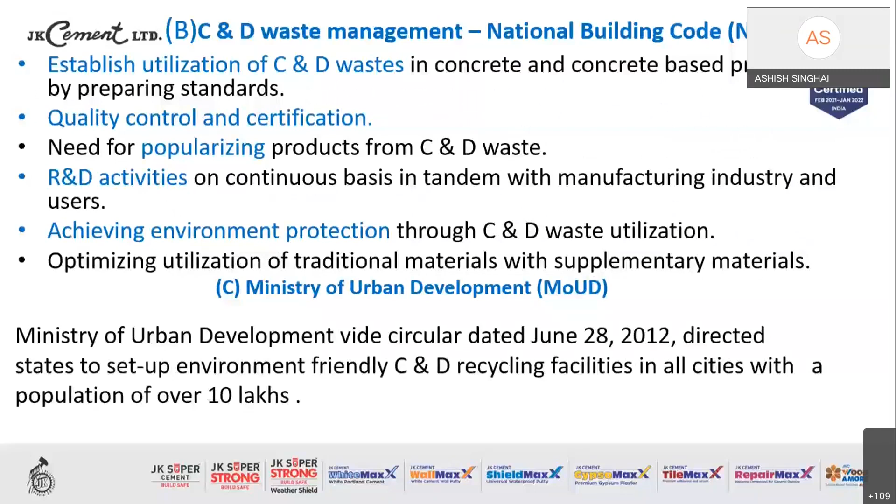BIS is responsible for preparation of the codes, practices, and standards. Indian Roads Congress is responsible for the concrete roads built by NHAI and other agencies. Whenever demolition takes place, whether of a concrete road or an asphalt road, the demolished material generated can be put into effective utilization.

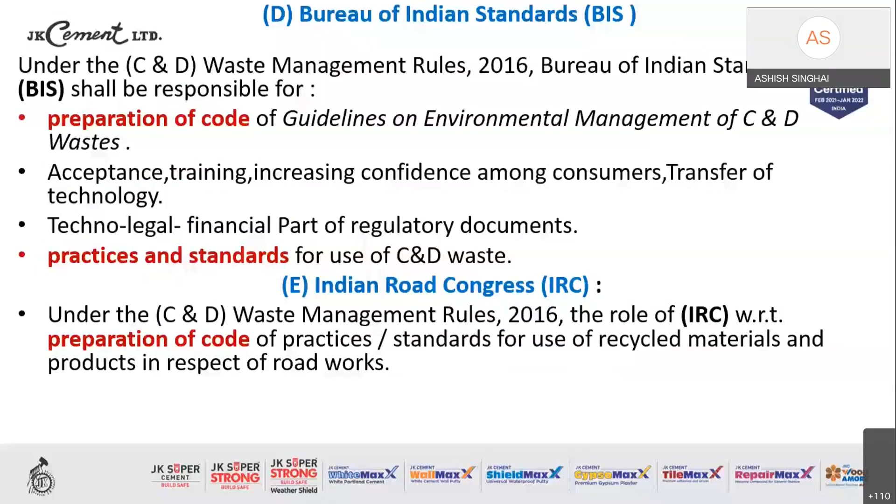Some very good initiatives have already taken place in India. One is under PPP, the public-private partnership model, by the Municipal Corporation of Delhi. There is a place called Burari where they have put up a 500 ton waste material processing capacity, and it is functional. The sand and coarse aggregate generated are sold to block manufacturers, curb stone manufacturers, tile manufacturers, etc. They have a wonderful model in place.

It is working. The second example is the Brihan Mumbai Municipal Corporation, BMC. They have also put up a plant at a place known as Deonar dumping ground, where construction waste is recycled, and they make tiles, bricks, and paver blocks there. Gurgaon is also following the same system.

In our Indore itself, Nagar Nigam Indore has already started collecting construction and demolition waste, and it is being processed. The sand and coarse and fine aggregate generated from that are used for making blocks, and these blocks are used for Pradhan Mantri Awas Yojana and other government buildings, etc.

Some recycling processes in other advanced countries: Germany is recycling up to 86% of C&D waste, and Japan almost 95% of C&D waste. India is in a very infancy stage; we are not even at 10% now.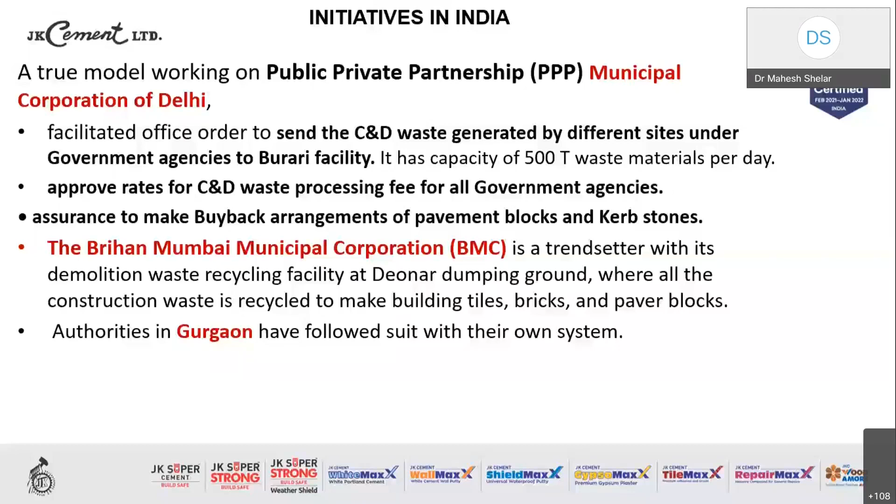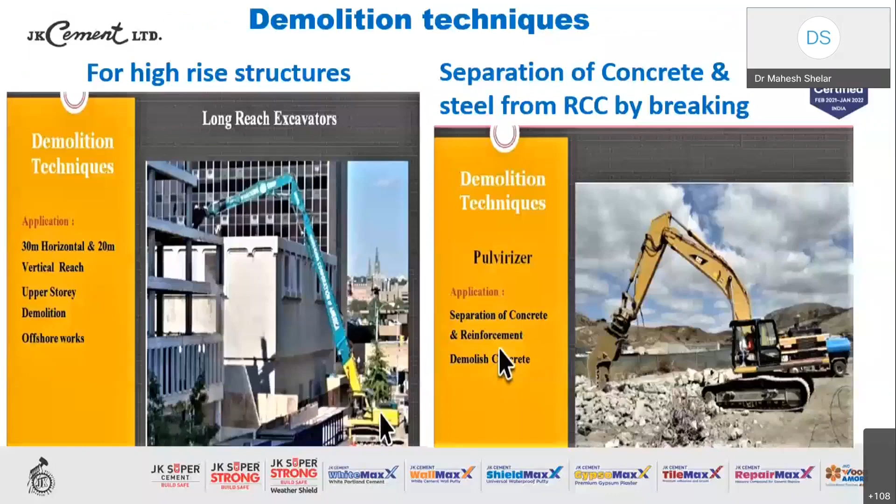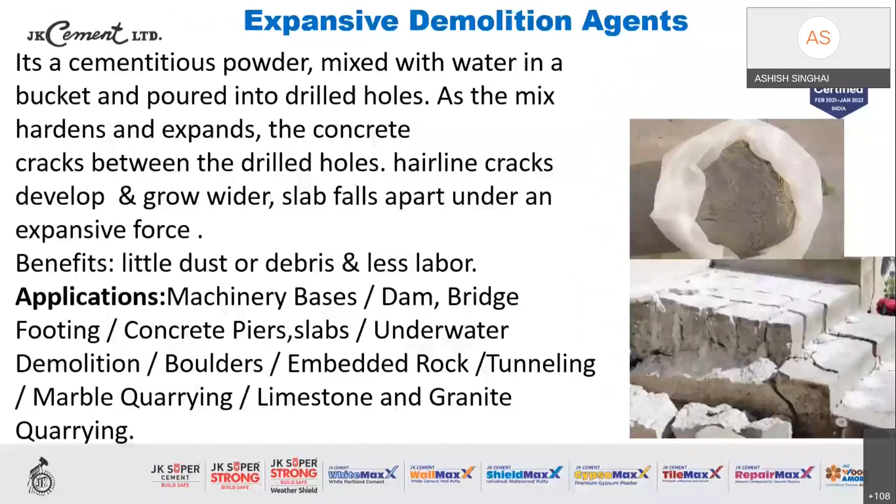This is the basic layout of a C&D waste plant. Construction waste is collected and sent to the vibrating feeder, then the jaw crusher, where the larger parts are crushed into smaller particles. There is an iron separator that, by magnetic force, collects the iron part and sends it to the recycle units. We have an impact crusher that gives very good screening, a vibrating screen, and finally we get the finished product.

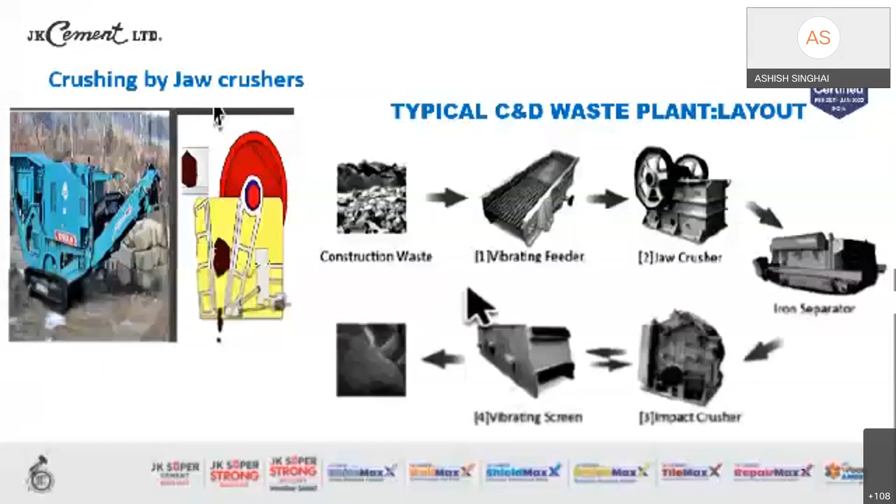That is how a plant in Burari, Delhi looks like, with different stages: screening, washing, and the final output. You can see aggregate of 10 to 20 millimeters, and aggregate of 3 to 10 millimeters. Different sizes can be screened and put into use as per industry requirements.

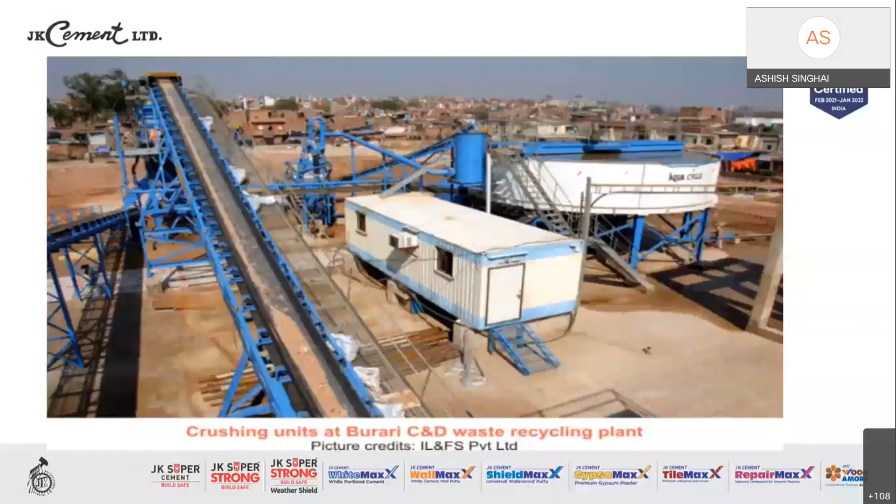Blocks, curbs, bricks, dividers, paver blocks, etc. This is the industrial application of C&D waste.

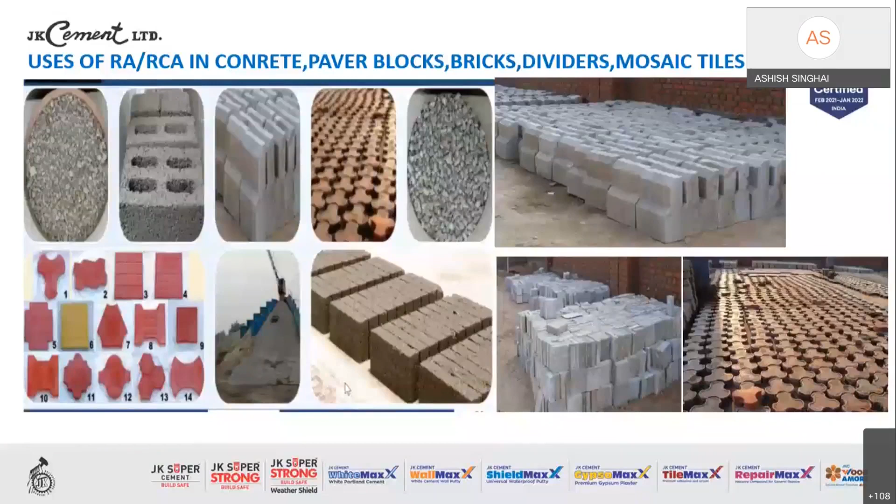Now, how to reduce C&D waste? First and foremost, we need to plan in such a way that waste is not generated at all. Second, modular construction, that is precast construction. Third, even if waste is generated, let us reuse it. Fourth, designing for long serviceability, that is durable construction. Open and flexible architecture layout, preserving the existing building fabric, meaning renovation. And ready-mix concrete is a very good answer to traditional in-situ concrete.

In case of in-situ concrete, a lot of material is wasted. Excuse me, sir, there is some disturbance from others on your side.

Yeah, Sanjit. Yes sir, I think somebody is complaining about sound noise disturbance. Can you please fix that? Sir, mute your mic, sir. I'm muting everyone. Thank you, sir. Singhai sir, please unmute yourself. Okay, just a second. Yes sir, am I muted? No sir, it's working now.

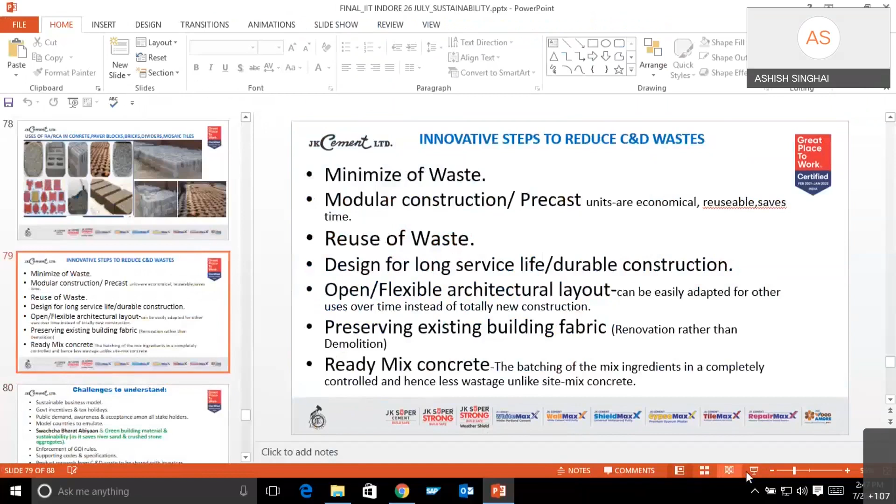Okay, fine. So now, ready-mix concrete, as I said, is one of the best replies to traditional fast in-situ concrete, wherein a lot of material like cement, sand, and aggregate is wasted. Not only that, there's very unmindful use of water also takes place, which is again a very costly resource.

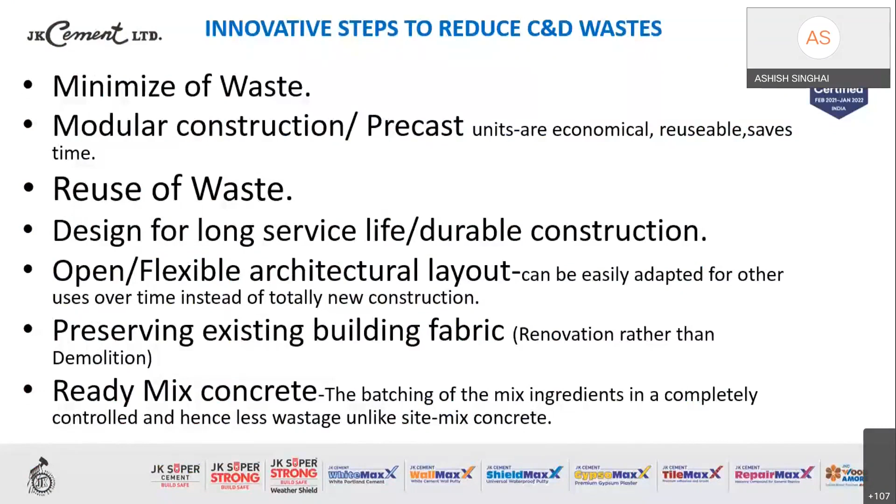What are the challenges? Sustainable business model, government incentives and tax holidays. I'm talking about C&D waste. Public demand, awareness, model countries to emulate. As I mentioned, Japan is using 95% of C&D waste, Germany is using 84% of C&D waste, China is also very high at about 70%.

In India, it is in a very infancy stage, I would say less than 5%. So we need to catch up with all those developed countries in a big way. Swachh Bharat Abhiyan is going to drive this particular campaign of green building materials and sustainability, enforcement by the Government of India through rules and regulations, supporting codes, product research, and environmental impact study. So they will all contribute heavily to encouraging C&D waste to be used more and more.

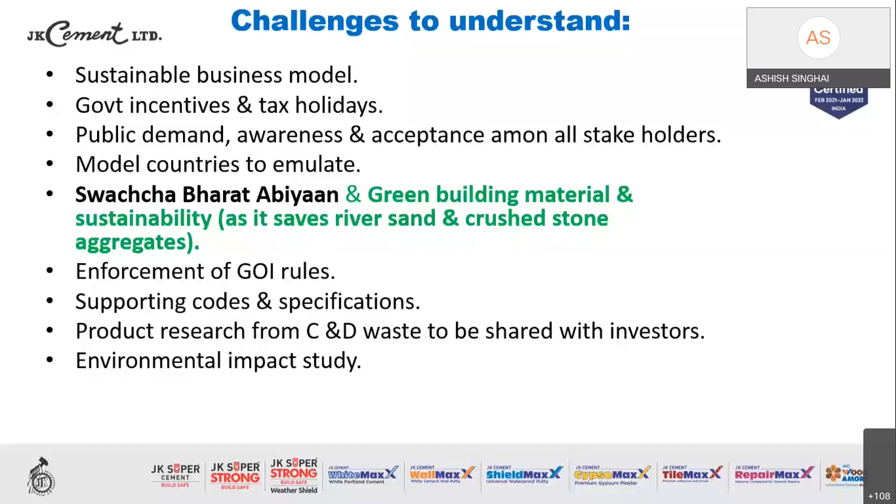Very interestingly, yesterday I was reading Dainik Bhaskar and Times of India, and I saw a news that our Indore municipal commissioner had imposed a fine of 5,000 rupees on a building owner who threw C&D waste in front of his own house, and as a penalty he was asked to pay 5,000 rupees. So these are certain initiatives that the government has to speed up and gear up, so that we are more encouraged to generate less C&D waste, and even if it is generated, it is transferred to the proper agencies and plants and converted to meaningful resources like coarse and fine aggregates.

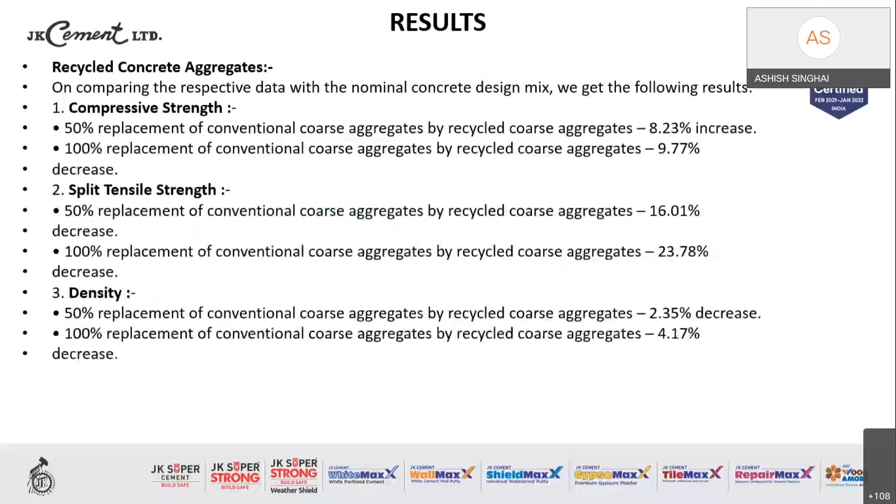I'll just skip a couple of slides which may not be relevant here. Okay, so this was what I was mentioning, that our own Indore city has manufactured more than 30 lakh bricks in the last 3 years, generating a revenue of about 60 lakhs. But here the revenue generation is not the key objective; the key objective is to reduce, reuse, or recycle the C&D waste and convert it into meaningful aggregates. So I just took a picture and incorporated it into this presentation.

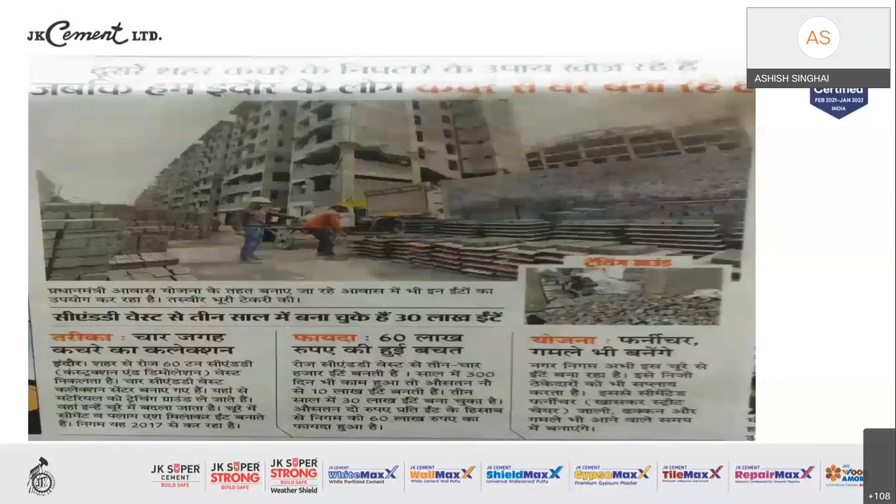Now I come down to the summary, because the topic of the day was how we can minimize the dependence on natural resources, and how we can ensure the sustainability of our natural resources by virtue of industrial experiences. A lot of industries, as I mentioned throughout this presentation, cement is going to be a key driver, steel industry is going to be a key driver, thermal power plant is going to be a key driver, and a lot of other industries like copper smelting units are going to be a key driver.

And obviously not to forget the construction industry. So all these industries put together, there is one industry which has the requirement of a certain item, and there are many other industries which have certain items that are quite wasteful to them, but it can very well be transferred or given to other industries or resources, wherein it can help in conservation of the overall natural system. So that is how this kind of synergetic effort would only ensure industrial sustainability.

So to summarize it all, industrialization cannot be prevented, urbanization cannot be prevented. It is quite essential for the nation's drive, growth and prosperity. But the conservation of natural resources is equally important. Using industrial waste like fly ash, GGBS, copper waste, C&D, manufactured sand, slag sand, etc., thereby conserving natural resources. Shifting towards renewable energy and less consumption of fossil fuel, that is coal. Innovate new methods, technologies, applications of fly ash, water reduction, thermal reduction, green concrete. And government needs to support increasing the percentage of fly ash and GGBS in concrete, so that our concrete becomes greener and our constructions become sustainable.

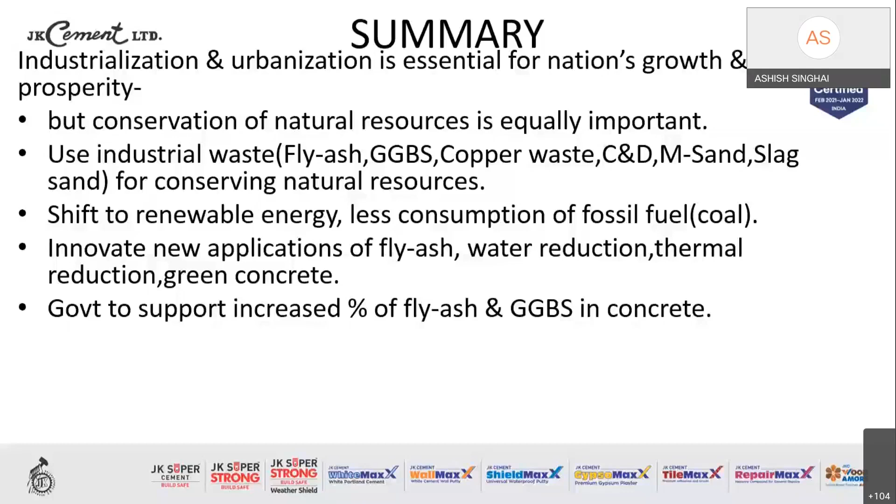So on this note, I would love to pledge here that let's make a sustainable, durable and greener world. Thank you very much for your patient listening.